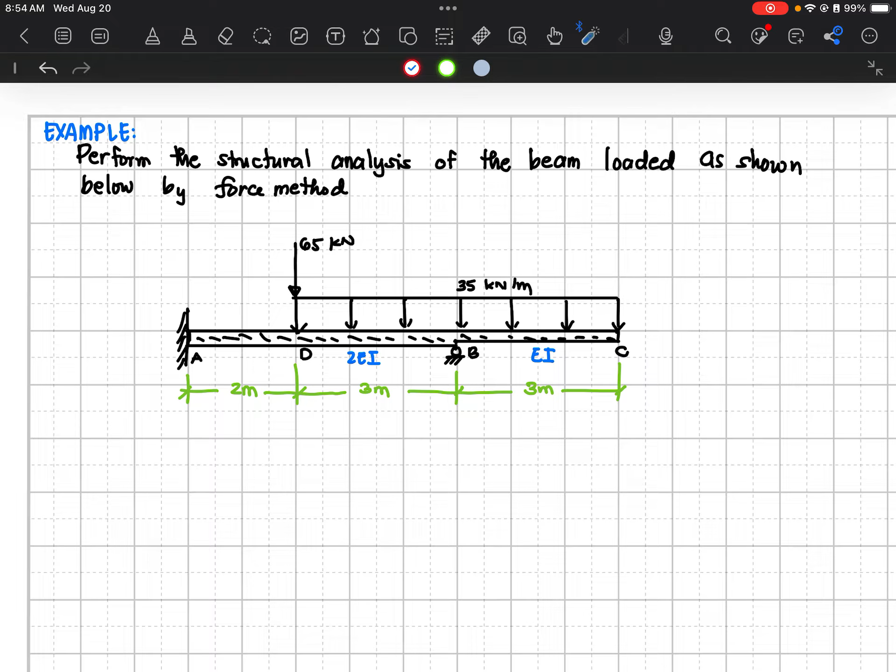So without further ado, let's now try to understand and solve this structure. The question is to perform the structural analysis of the beam loaded as shown below using the force method. So let's not delay further, let's solve this right away.

For the solution, let's try to copy this. Although obviously this is a prop beam class, and as you know, a prop beam is statically indeterminate to the first degree. But still, it's better if we check it.

At A, there will be two reactions, AY and the moment at A. At B, we have BY. So here, the number of reactions is 3 and the number of members is 1. Take note, our check formula for beams is R equals 2M. So this is 3 versus 2 times 1. Obviously, 3 is greater than 2, and therefore this is indeterminate to the first degree, since 3 minus 2 equals 1.

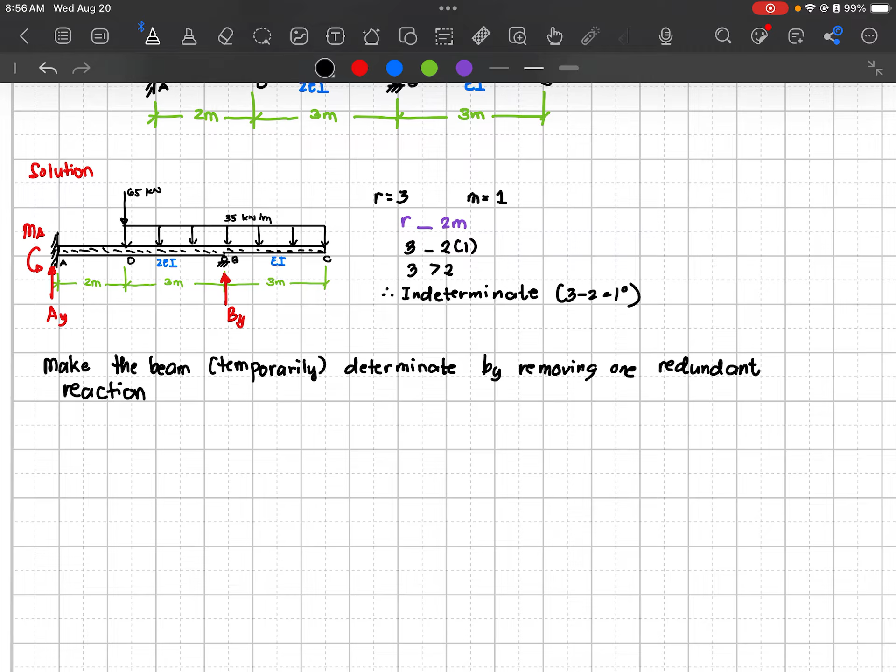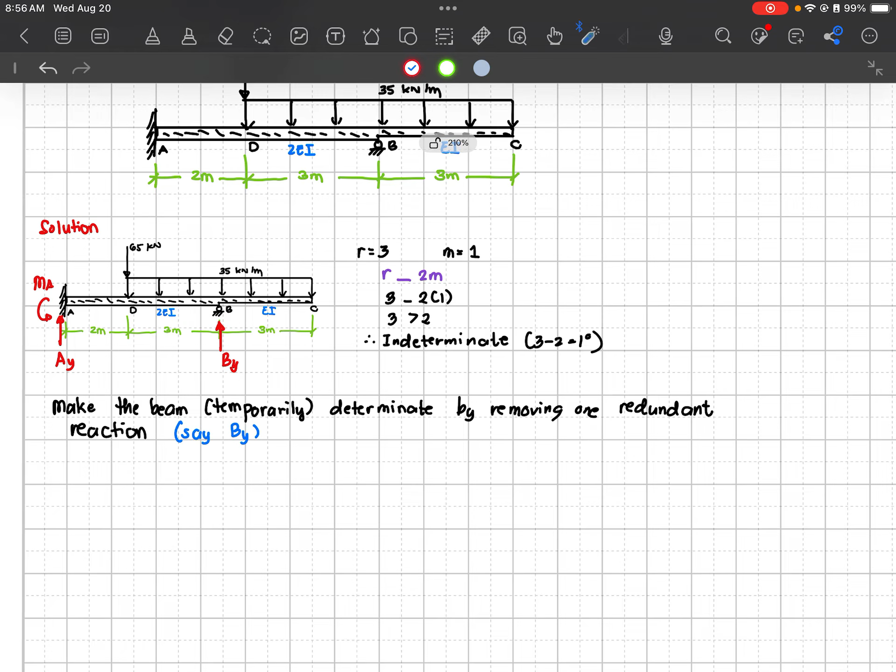We do this by removing one redundant reaction. So that's what we'll do - we'll try to make it determinate by removing a redundant reaction. Usually, it's the simple support that we remove, so it means this roller support at B is what we'll temporarily remove. But again, this is only temporary since we need to use the unit load method.

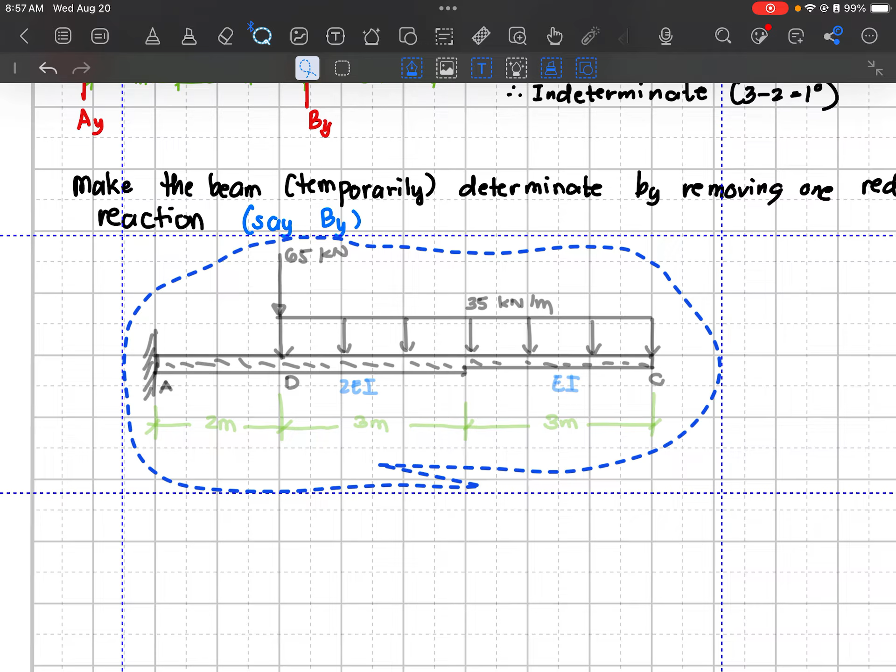So here it is. Let me remove that, and therefore, with the moment that I removed, it becomes a cantilever beam. Take note, a cantilever beam is a statically determinate beam, meaning we can solve the support reactions by statics alone. So that's what you'll do, class.

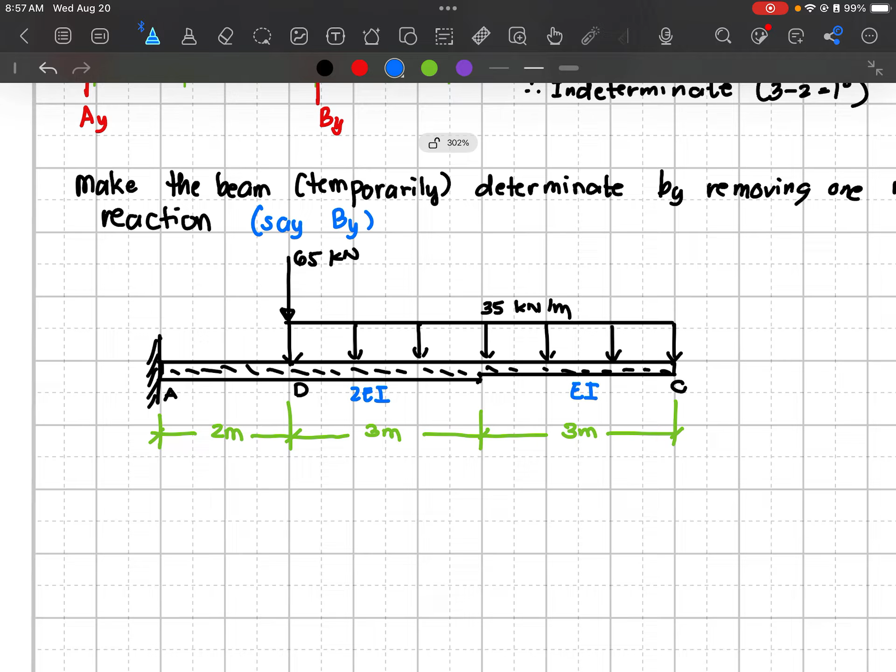Please compute for the AY and also the moment at A. If you want to solve it on your own, please pause this video for a while. So go ahead and pause it now.

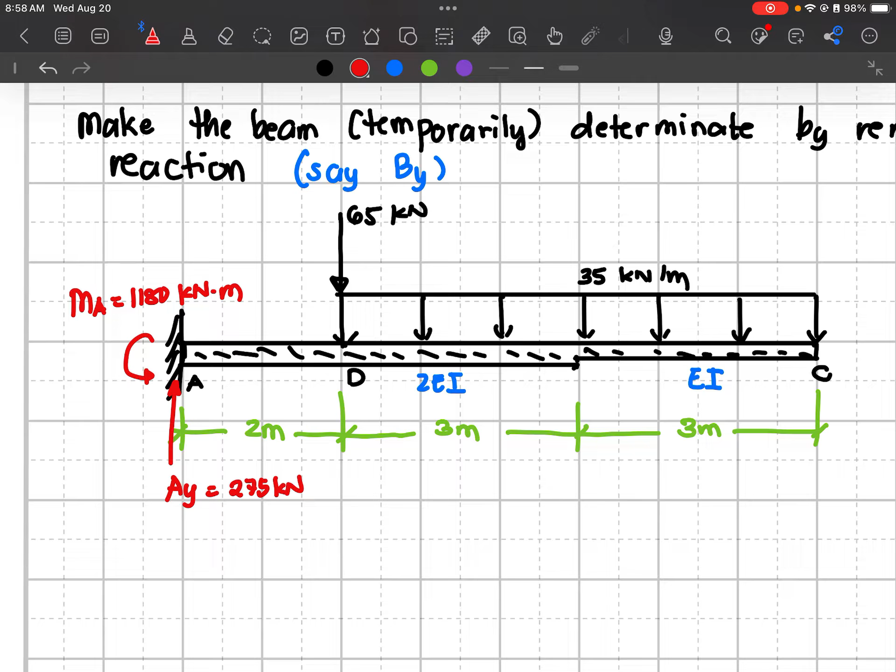Now I assume you've played it and solved the support reactions, and you want to check if your computed values are correct. Let's check. So actually, the AY here, class, is equal to 275 kilonewton, and the moment at A is 1180 kilonewton meter. So those are our temporary reactions, class.

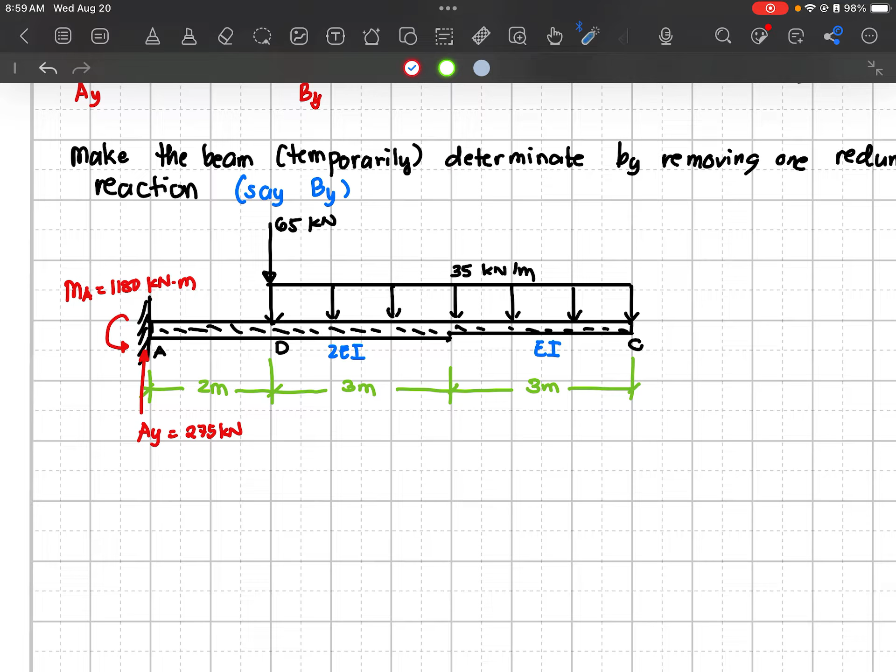The next thing we'll do is derive the moment functions of our beam. Here, it's divided into two spans, class - that's AD, then the next, DBC. As you can see, should we consider separating DB and then BC? You could, class, but that would just waste your time and another drawing, so you can treat DBC as one span.

Remember, the causes of discontinuity in the moment function are only if there is a change in behavior of the load, which from D to B to C, there isn't, or the existence of a concentrated load within that part. So there isn't.

Hindi po nakaka-affect yung pag-change ng flexural rigidity. Yun yung tandaan nyo, no? The change of flexural rigidity will not affect the derivation of the shear and moment function. So at this point, dalawa lang siya, yung AD, tapos yung DBC.

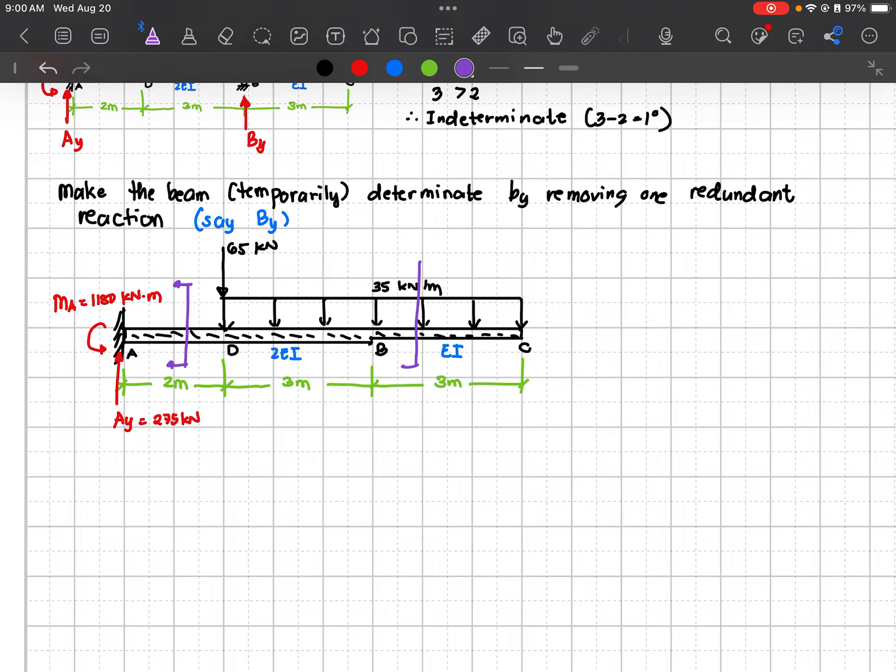So yun lang yung i-consider natin, no? Dalawang cut ang gagawin natin para ma-derive yung dalawang moment function, no? So first gawin natin. Pag kinonsider natin yung AD, obviously class, the limit of that is from 0 to 2.

So i-drawing mo lang siya. Tapos lagay lang natin yung AY as 275. Yung moment at A is 1180. So ito yung point A natin, class. Tawagin natin yung point of cut as point X, and the distance is of course X. Ang dinodrawing ko itong part na yan because as you can see, from A to that point, wala namang load na nag-a-act, no? And of course, do not forget yung mismong moment natin na naka-counterclockwise.

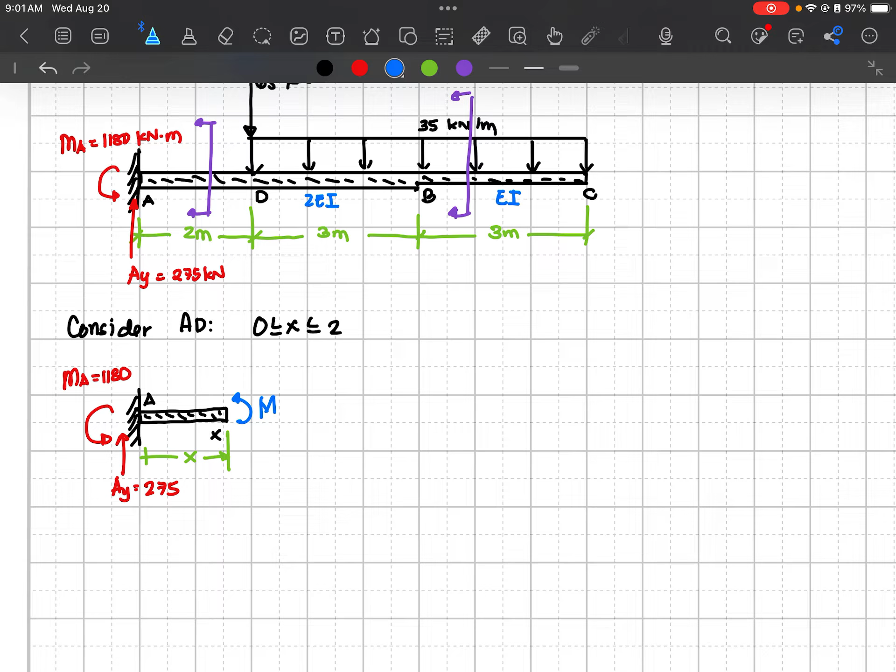So here, summation moment at X is equal to 0. So clockwise moment equals counterclockwise moment. Ang clockwise moment lang dyan is yung 275 times X, and yung counterclockwise is yung 1180. And of course the moment itself or the moment function, kaya obviously yung moment natin dito ay 275x minus 1180. So ayan, na-derive na natin.

So yung sunod na i-consider ko lang, class, para ma-derive yung M is itong DBC. Ayan siya, consider DBC, and that's from 2 to 8. 2 to 8 na yan, class. So pag drawing natin siya.

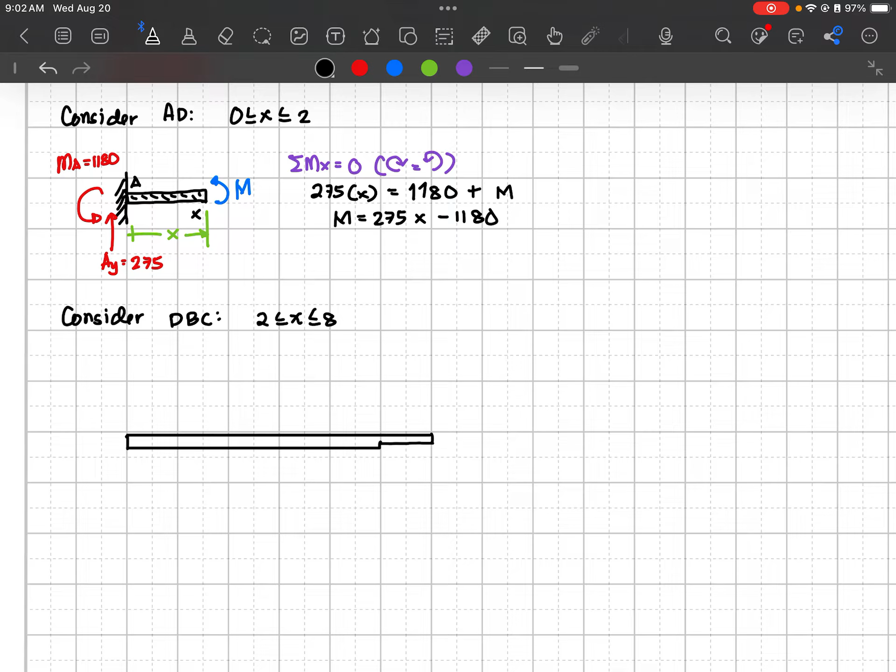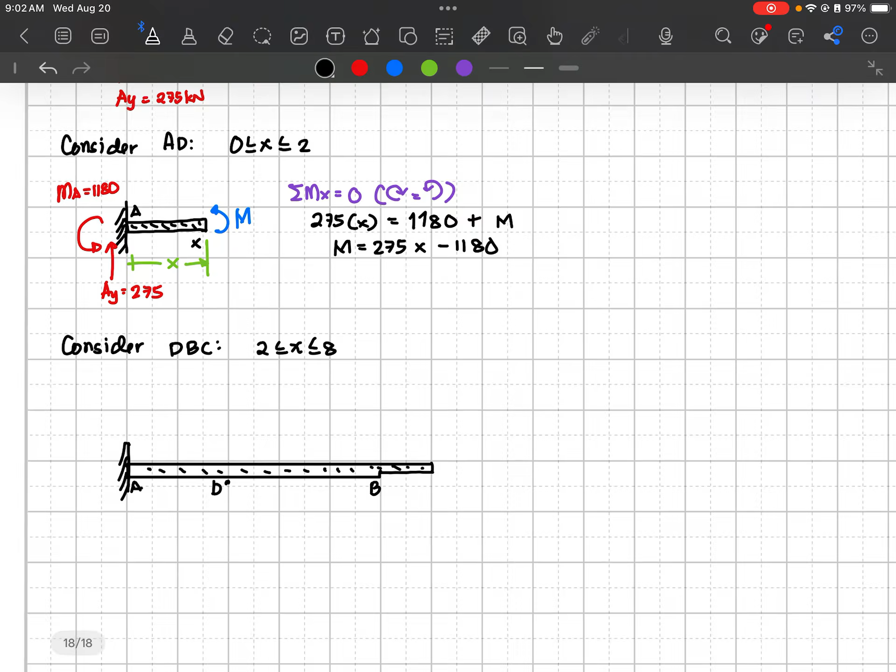Ayan, pasensya na. Ito yung A, nandito yung point D, ayan yung B. So lagay lang natin, class, yung lahat ng loads, might as well the reaction. Yung idodrawing ko itong part na to ng beam natin kasi nasa DBC na tayo, class. So here, the load, do not forget. Tapos yung concentrated dito, na 65 kilonewton, ito naman 35 kilonewton per meter.

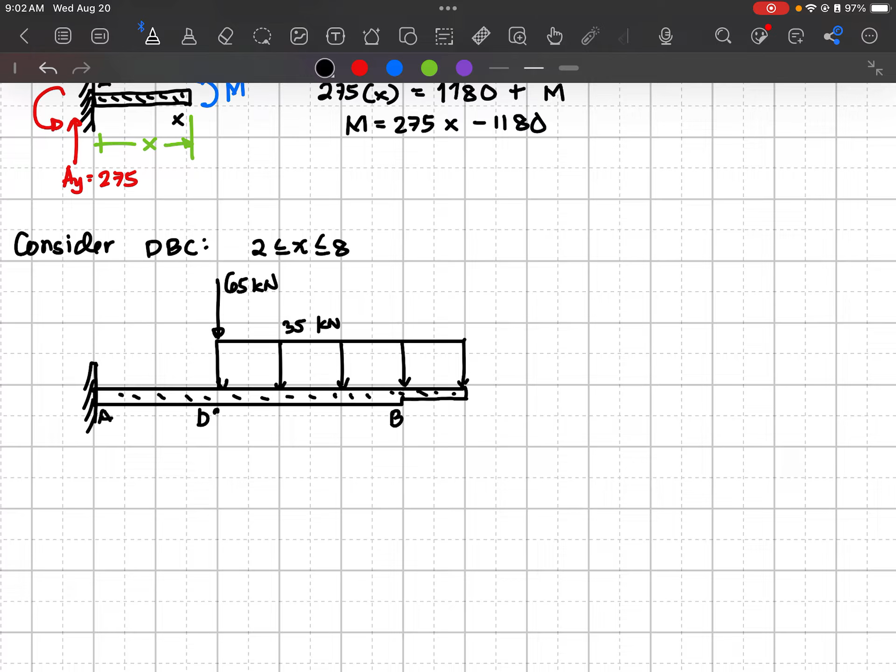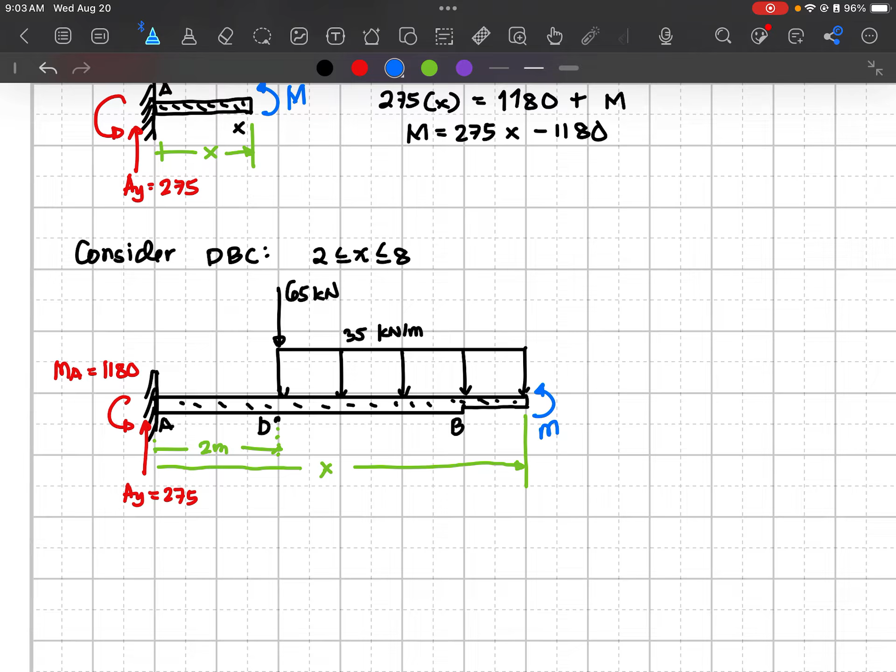Then yung sunod naman, yung AY na 275. Tapos yung moment at A na 1180. Then ito, distance X, ayan siya. I-set natin to as distance X. And alam naman natin from A to D, that is 2 meters. So here, ang ilalagay na lang natin is the moment, capital M pala to, because it's referring to the real loads.

So sige po, summation moment at x equals 0. So clockwise moment equals counterclockwise. Nakalimutan kong iset ito as point x. So here, for the summation moment, yung clockwise moment is only the 275 multiplied by x, as you can see, clockwise siya. And the counterclockwise magsisimula sa 1180, and yung mismong 65 kilonewton, counterclockwise yan, and that is, ang moment arm niya ay x minus 2, diba?

So 65 times x minus 2. And do not forget the rectangular load, 35. Yung haba niya ay x minus 2. So x minus 2 siya. And do not forget that the center of gravity is here, which is obviously kalahati yan ng x minus 2. So here, lagay ko siya 1/2 ng x minus 2. Then plus the moment itself. So ayan na po, yung ating equation.

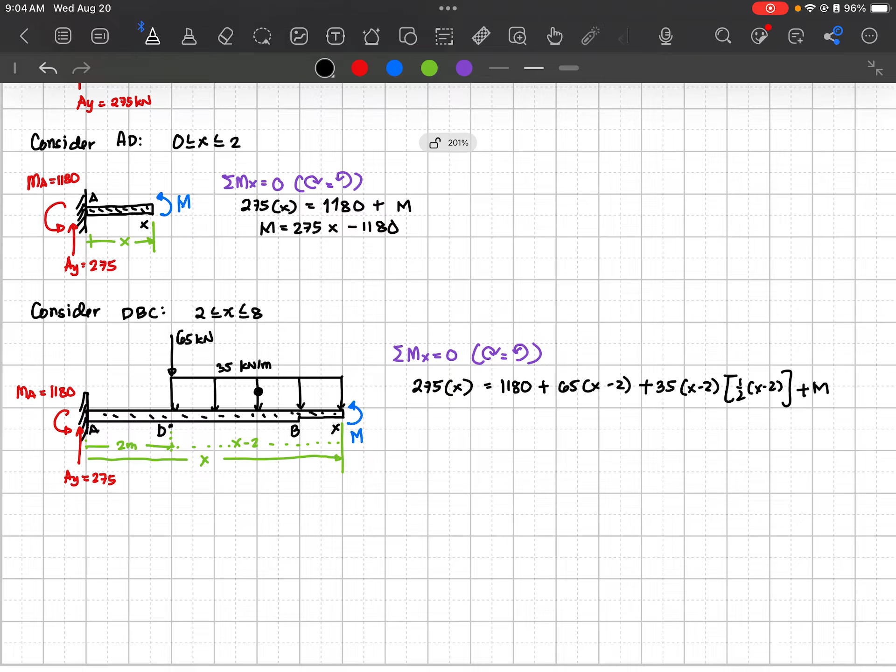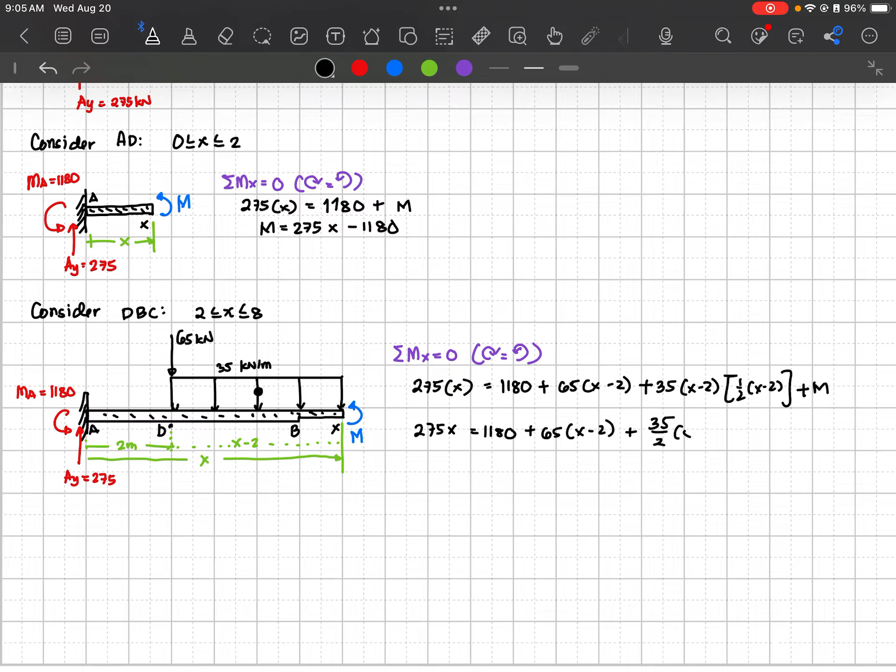So simplify further, so this is halimbawa: 275x is equal to 1180 plus 65(x minus 2) plus, pag sinimplify mo yan, 35 over 2 times (x minus 2) squared plus moment. And therefore, yun na nga, the moment function is 275x minus 1180 minus 65(x minus 2) minus 35 over 2 (x minus 2) squared. So na-derive na natin, class, yung moment function natin for DBC.

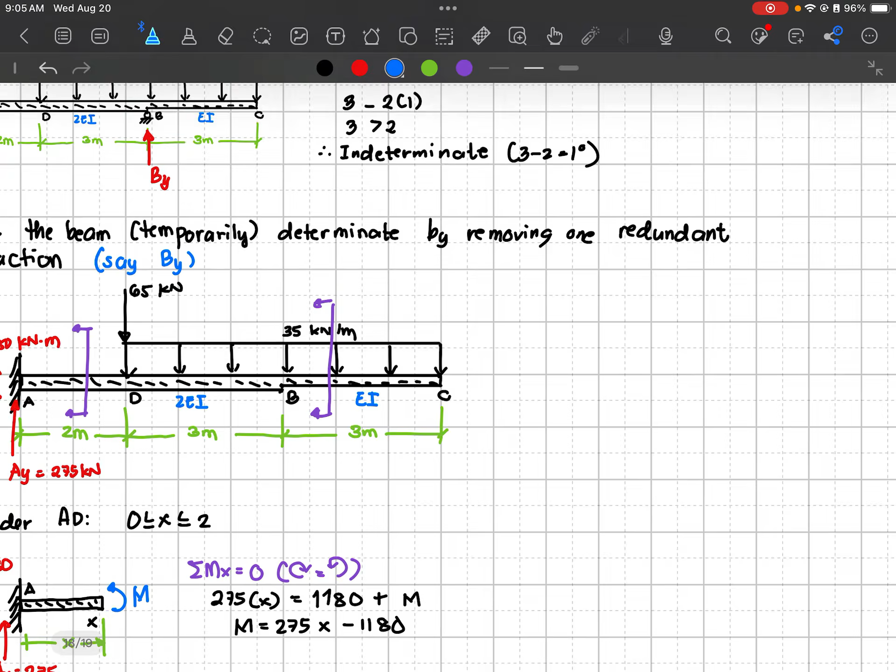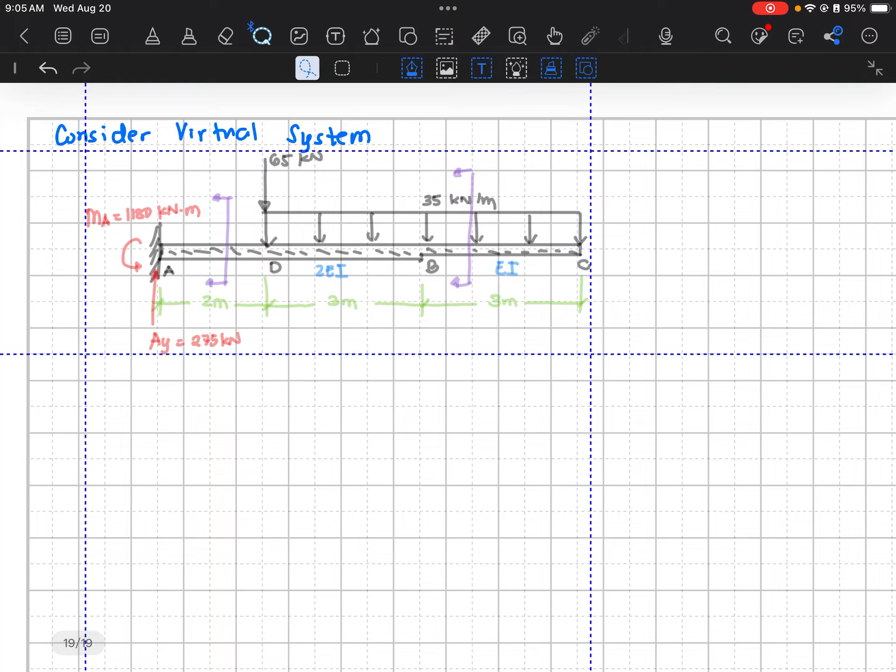So ngayon, tapos na tayo dyan. We will now consider the virtual system. Consider virtual system, class. And in this case, syempre, i-consider ulit natin itong temporary beam natin. Again, yung temporary, yung tinanggal mo yung support at B, kasi nga yun ay sa ngayon determinate pa.

Ayan, pero ngayon, ang magiging kaibahan, class, is dahil nasa virtual system na tayo, tatanggalin natin yung lahat ng load. So even this one, ayusin na lang natin. Dapat pala, yung kinopy-paste ko na lang yung original beam. So erase ko lang po ito. Ayan, so yun, dito na lang.

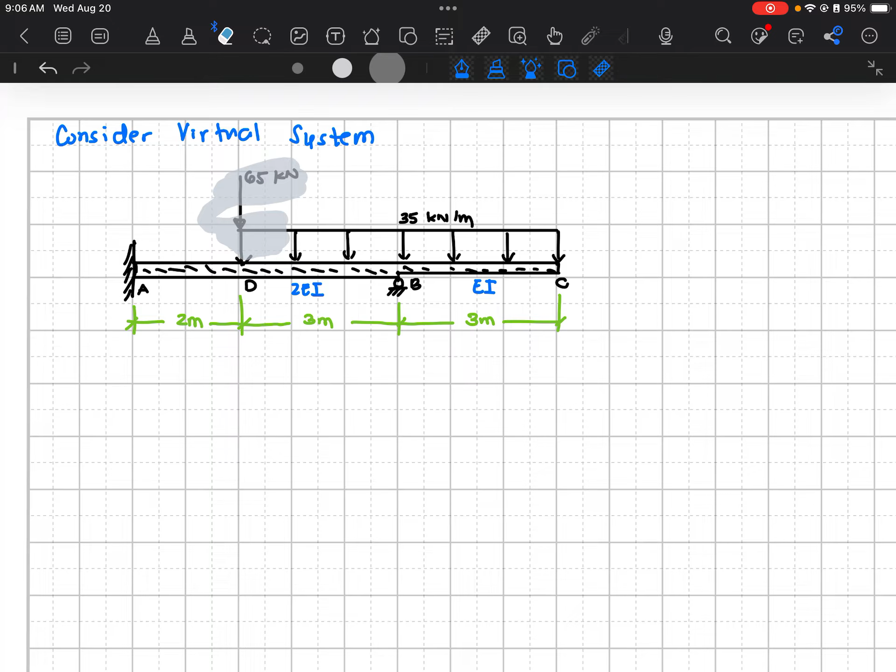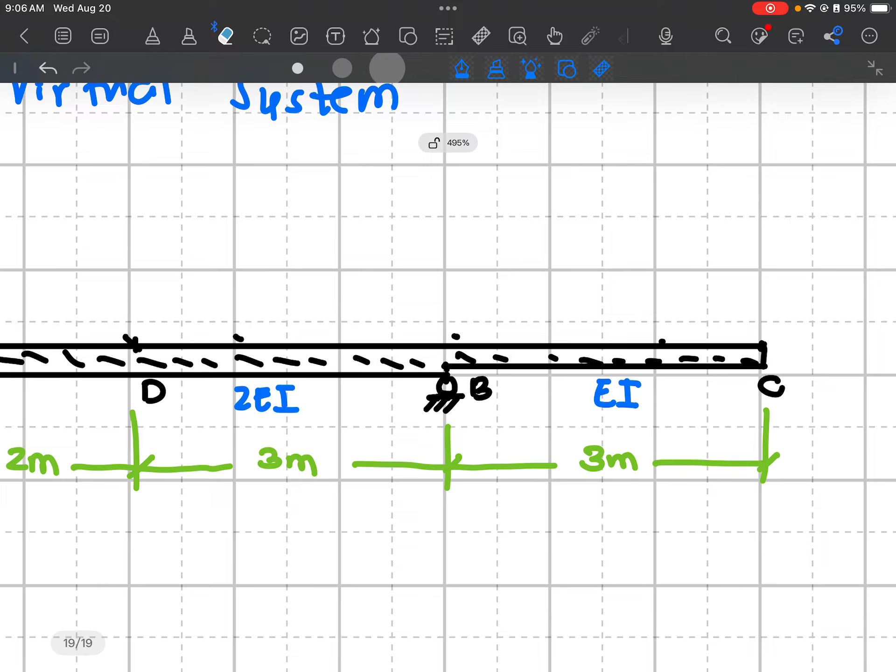So kung i-consider natin itong virtual system natin, tatanggalin natin this time yung lahat ng loads. Remove. Konting polish. Tapos yung support at B ay still remove at this time.

Ngayon class, ang mangyayari dito, kapag virtual system and using force method, maglalagay tayo ng force sa B. Bahala ka na kung yung gusto mong ilagay na force ay pataas or pababa. Usually naman, ang nilalagay natin ay pababa, depende na lang sa inyo kung ano yung direction ng ilalagay mong force at B. Bakit sa B? Kasi yun yung original na location nung tinanggal natin na hinge support, o roller support, kaya dapat dyan ka maglagay ng unit load.

So ngayon, dahil dyan, yung next lang naman na gagawin natin dito, class, is to determine the reactions at A, which is very obvious naman na yung AY is equal to 1 and yung moment at A this time is equal to 5. Simple equilibrium lang yan.

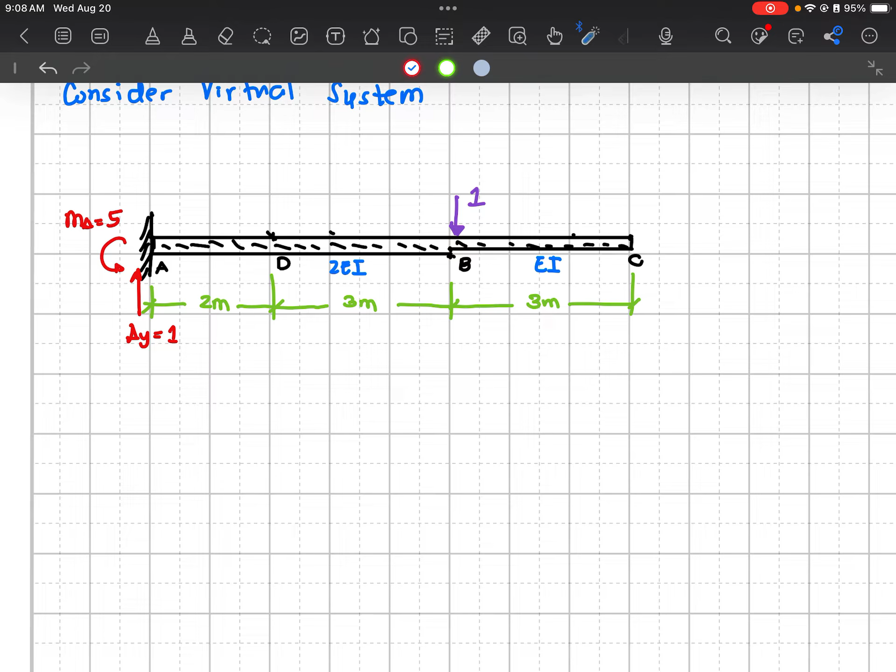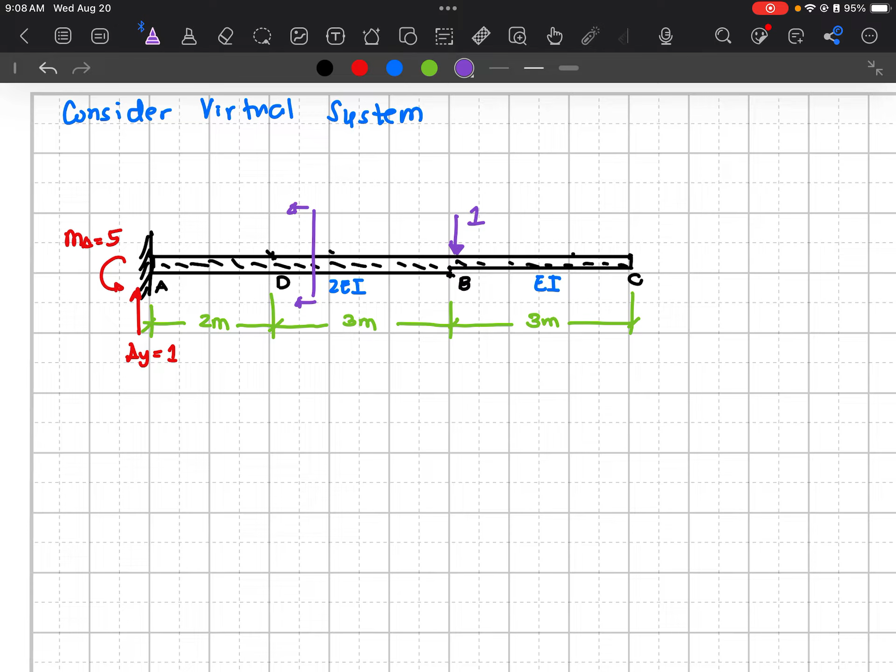Then yung next, magdi-derive tayo ng dalawang moment function sa virtual system. Yung una, para sa ADB, dire-diretso lang siya hanggang sa B. Tapos yung pangalawa naman is para sa BC. So dalawang cut ang gagawin natin dito - para sa ADB, which is from 0 to 5, at para naman sa BC, which is from 5 to 8. Sige, gawin ko na siya para hindi sayang yung oras.

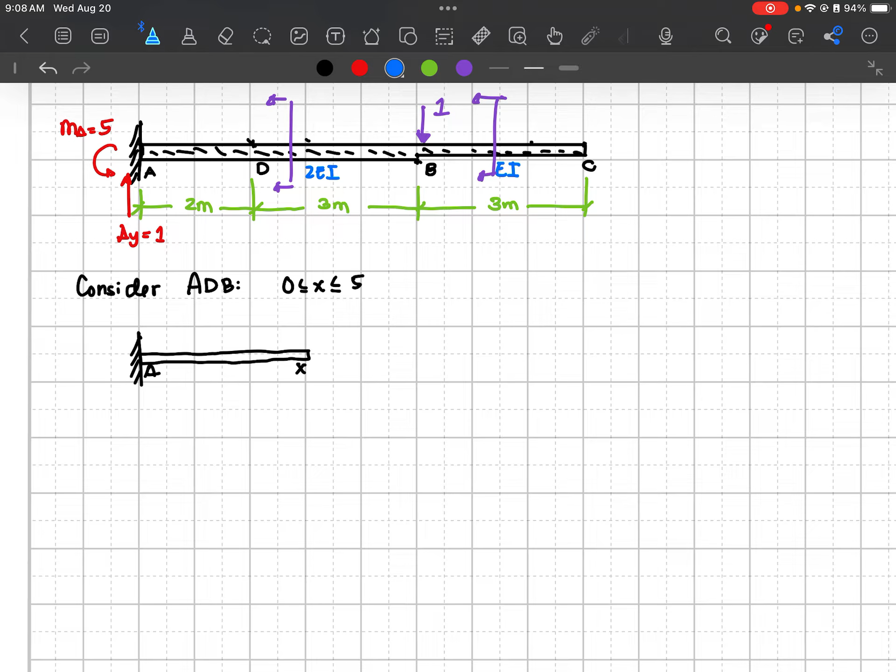So pag kinonsider natin yung ADB, which is from 0 to 5, i-drawing mo lang class itong part na to. Dito nga, tiyagaan talaga sa pag-drawing. Ito yung A, tawagin ko yung point X as the point. Tapos lagay ko lang yung M - kasi pag due to the virtual load, small letter M - so distance X, do not forget.

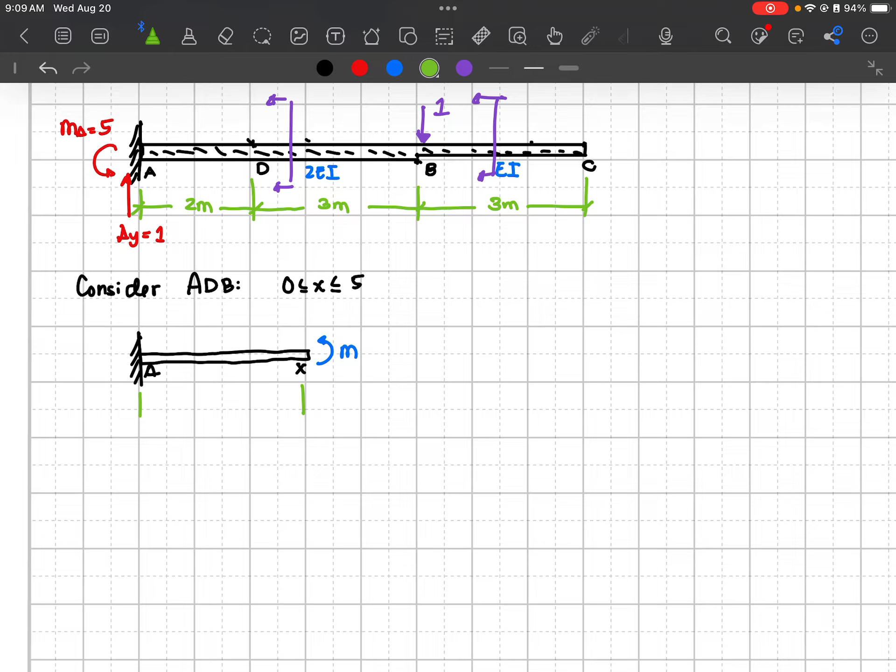Ayan siya. Then yung support reactions natin, AY is 1, moment at A is 5. Here, it's very simple: summation moment at X equals 0, so clockwise moment equals counterclockwise. Yung clockwise, 1 times X, at yung counter, 5 plus M - kasi ito counter, ito din counter. Pag sinimplify mo to, X equals 5 plus M, or yung M natin ay X minus 5. So that is now the moment function from 0 to 5.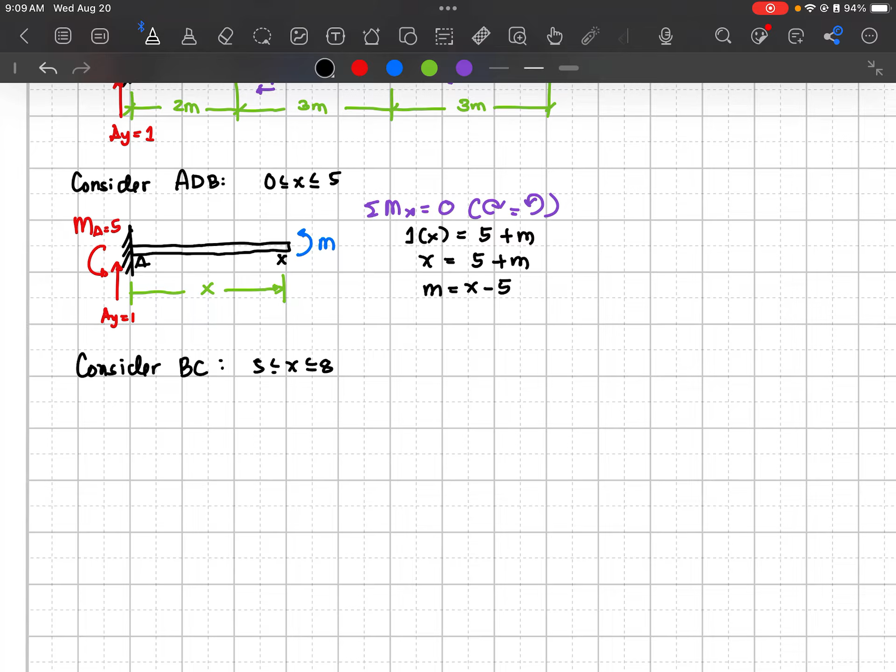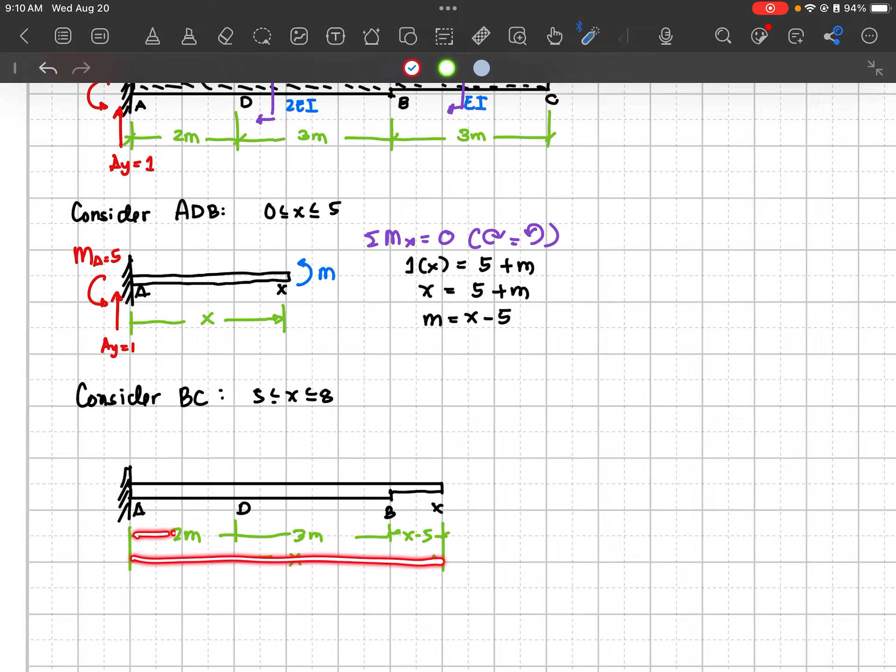Then finally, consider din natin dito yung BC, which is from 5 to 8 - yun naman yung magiging limit niya dito. Drawing ulit natin yung beam na mas mahaba. Ito yung A, ito yung D, ito yung B. Tawagin ko lang yung point of cut as X. Alam naman natin na ito 2 meters, ito 3 meters, at finally itong part na to is X minus 5. Very obvious, kasi syempre ito naman 5 meters, so dapat yun ay X minus 5.

So of course, huwag kalimutan, may nilagay tayo ditong reaction na 1, tapos o yung unit load na 1. Then ito naman, AY is 1, moment ng A is 5. Here, ang kalalabasan ulit, summation moment at X equals 0, so clockwise moment equals counter. Nakalimutan kong maglagay ng small letter M dito.

So yun, ang clockwise is simply 1 times X, and for the counter, obviously that's 5, tapos yung unit load natin na 1 na X minus 5 plus the small m natin. Pag sinimplify ko to, X is equal to 5 plus, pag dinistribute ko yan, X minus 5 plus M. Obviously, as you can see, cancel out yung 5 kasi 5 minus 5 is 0. So X is equal to X plus M. Pag nilipat mo yan, M is equal to X minus X, or pwede mong sabihin ang moment natin ay 0, which is okay lang naman. Normal din lang naman din na may ganyang instance.

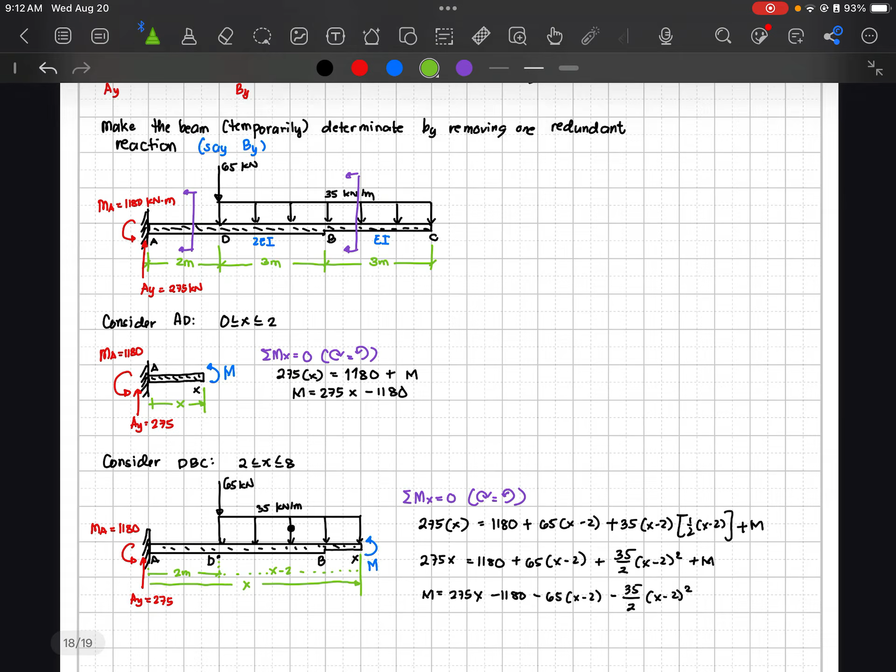So ito na yung ating moment function from 0 to 5, at ito naman yung moment function from 5 to 8. So this is the way - ito yung real system ng temporary determinate beam natin, at ito naman yung virtual system. Itaas ko lang.

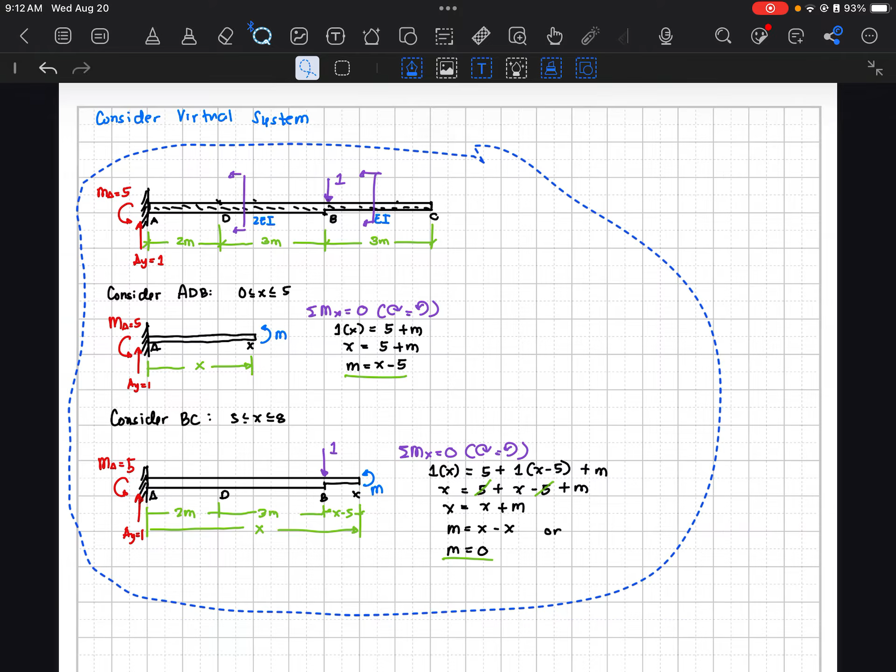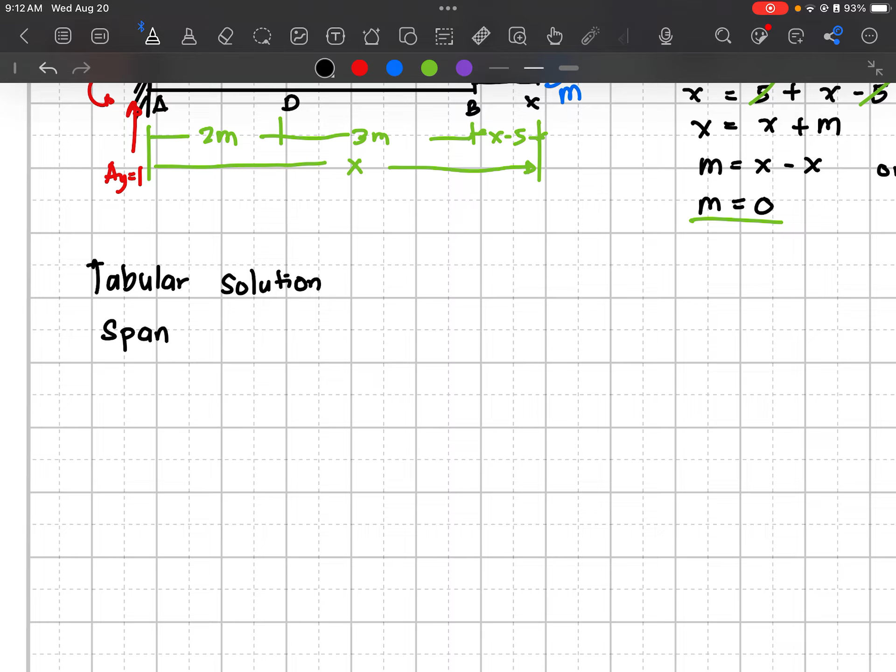Ayan, no? So now, para mas malinis yung magiging solution natin, gawan natin to class ng tabular solution. So here, meron tayong mga span. Tapos, yung span natin ay 3 at this point, no? Pero sige, later on na lang.

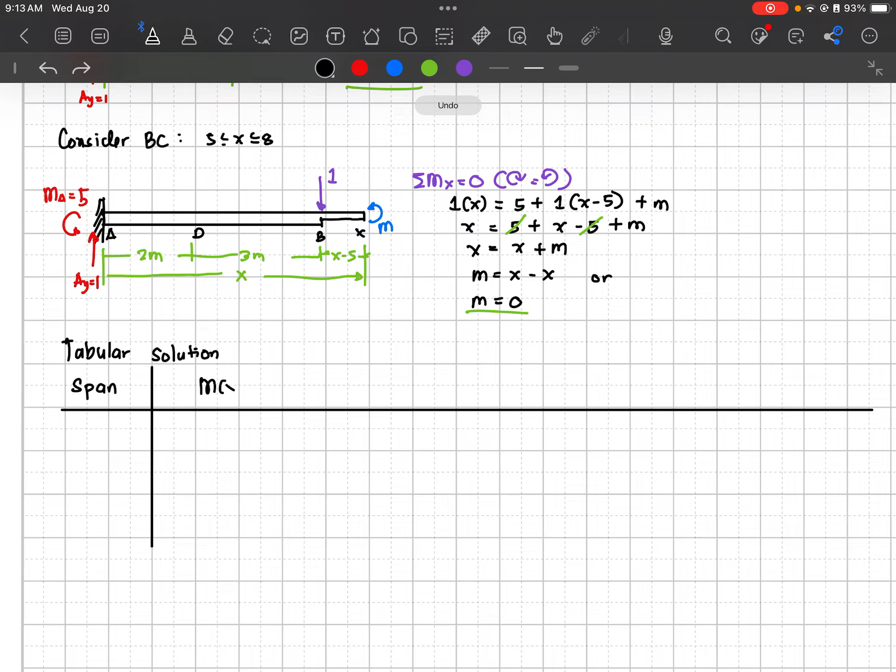Ayan, no? So meron tayong span. Tapos yung next na isusulat natin, yung big M, no? Pero dito class, para tuloy clear, hahatiin natin to sa 3 span as the original, yung AD, yung BD, and yung BC, no? Yung AD, that's from 0 to 2. Yung DB that's from 2 to 5, and yung BC that's from 5 to 8, no?

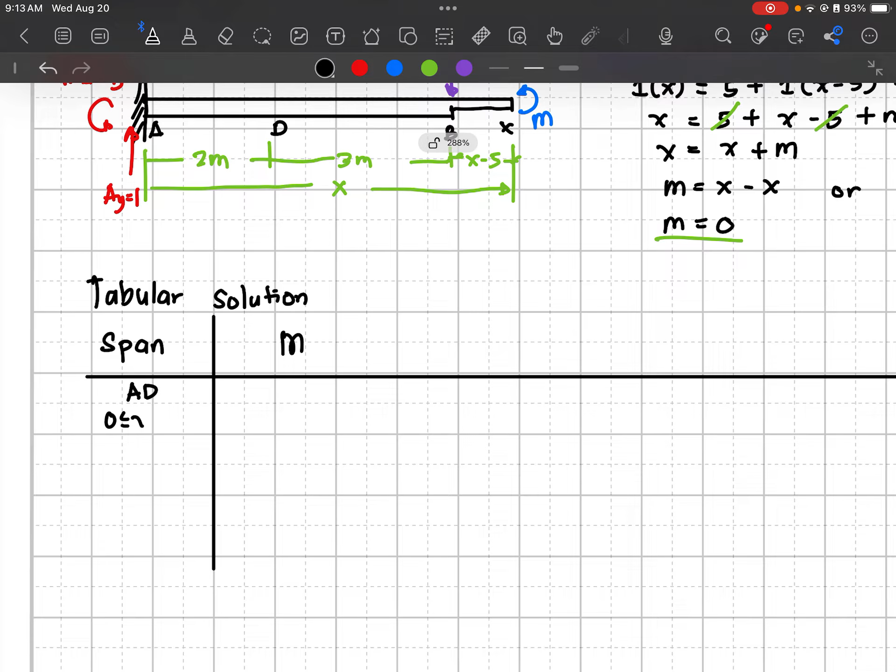So para maging ano tayo, no? Maging mas maayos yung solution natin. So again, yung AD from 0 to 2, adjust natin yung magiging borderline. So ayan siya.

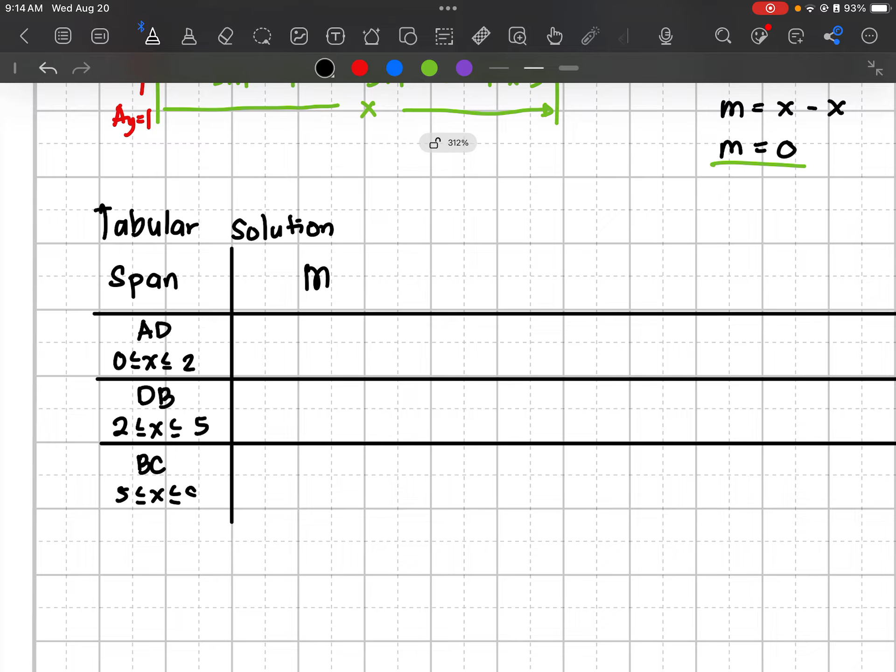Tapos yung sunod naman, yung DB that is from 2 to 5. Ayan, no? And finally, yung BC, that is 5 to 8. So ayan yung ating mga span.

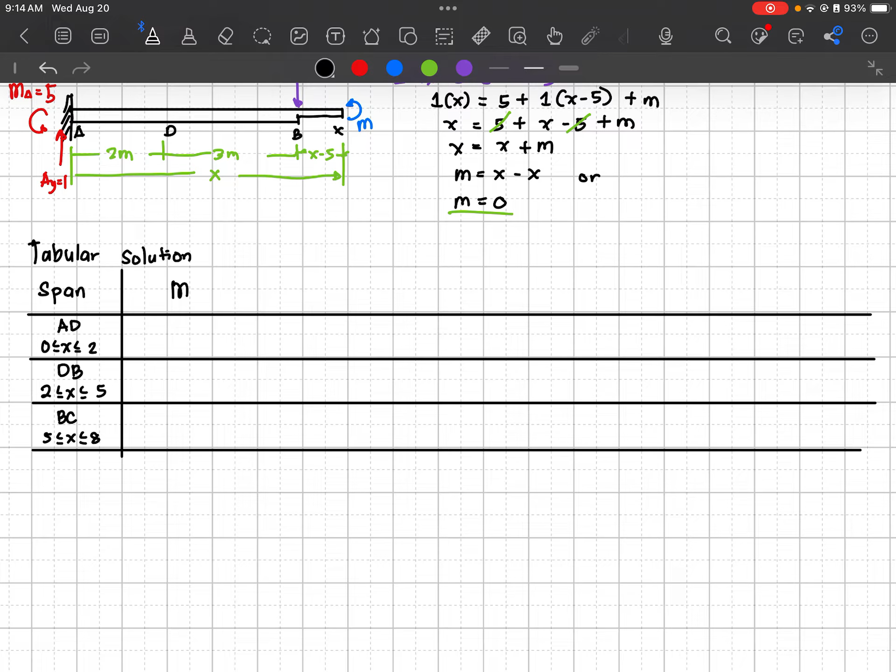So yung next na i-consider natin, class, is yung big M. So as you can see, dito sa real function, itong unang na-derive natin is from A to D. So ibig sabihin, from 0 to 2 lang siya. Kaya itong 275x minus 1180 ay para lang yan sa A to D.

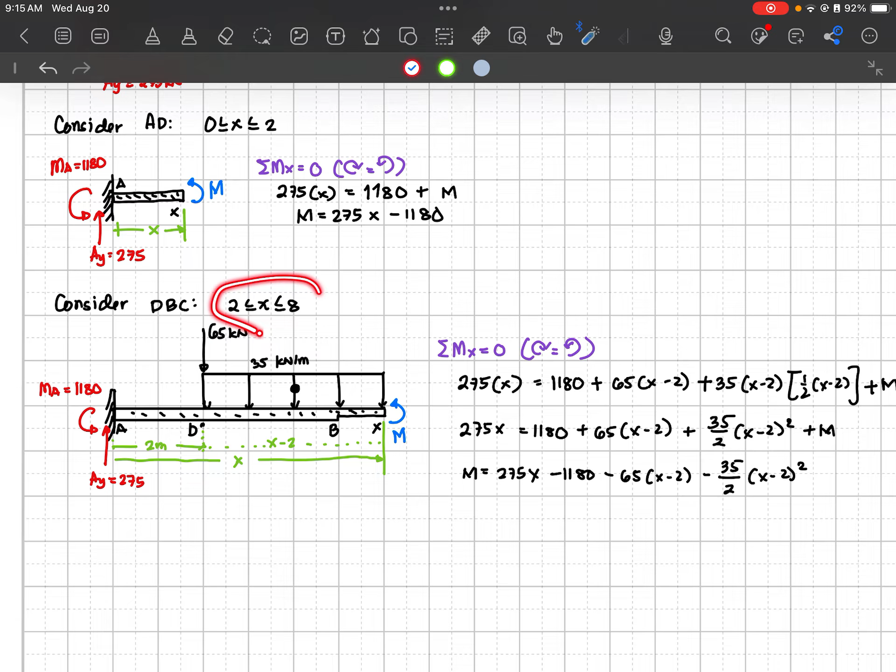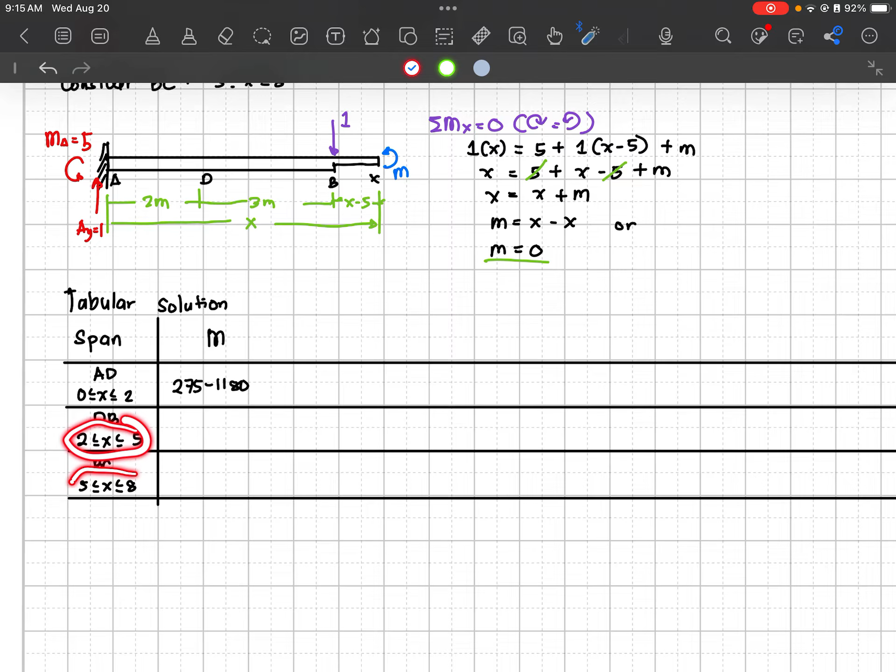Pero tandaan nyo na yung sumunod na span na na-derive natin from DBC, ibig sabihin from DB and at the same time from BC. So yung dalawang yon isang function lang siya, which is itong 275x minus 1180 minus 65 times x minus 2 minus 35 over 2 ng x minus 2 squared. Kasi nga, di ba, yung limit natin is from 2 to 8. Ayan, no, 2 to 8 na siya. So ibig sabihin, pag sinulat ko siya, itong DB sa BC, isa lang itong moment function niyang M, kasi nga itong DB 2 to 5, yun naman 5 to 8. So parang pinagdugtong mo lang siya para maging 2 to 8, no?

So ayan. So ito pala mali yung nasulat ko. 275x yun, minus 1180. Ito naman, 275x minus 1180 minus 65x minus 2 minus 35 over 2 x minus 2 squared. Tandaan nyo, no? Same din lang naman yan sa BC. 275x minus 1180 minus 65x minus 2 minus 35 over 2 ng x minus 2 squared, no? So ayan, nasulat na natin yung big M.

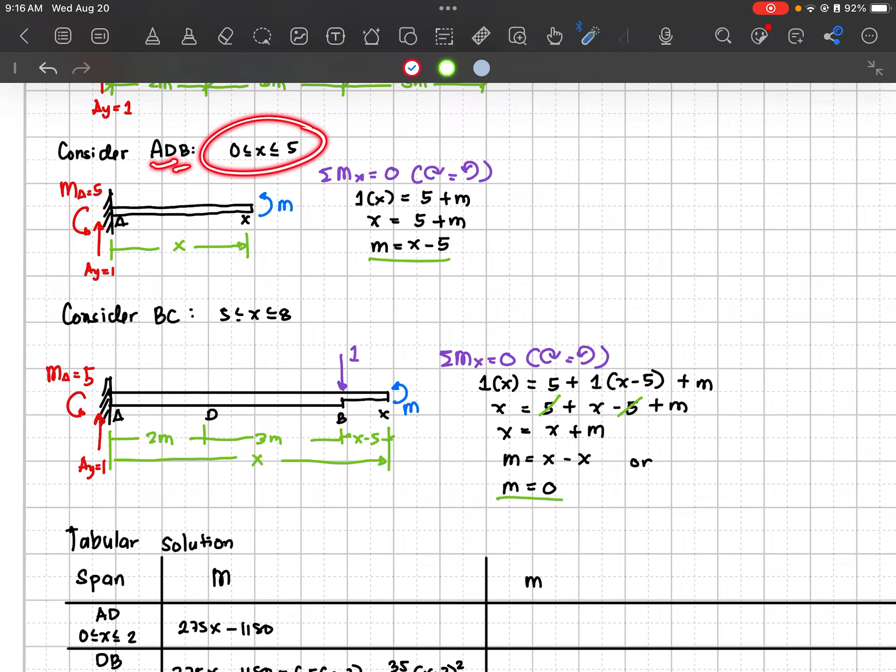So let's proceed to the small m. So sa small m naman, dalawa yung na-derive natin. And tandaan nyo, yung unang na-derive natin is from AD and DB. So ibig sabihin, from 0 to 5 siya. So sa table, ito yung isusulatan mo. Yung AD at the same time yung DB. Kasi from 0 to 2, then 2 to 5, no? So ganun yung system dyan, no?

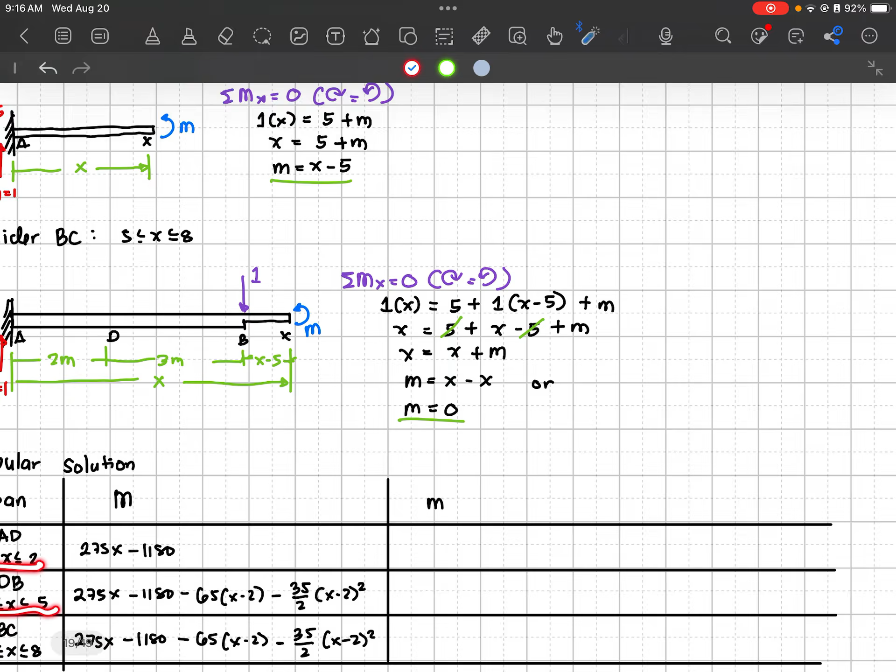So ito, isulat mo, x minus 5 and x minus 5. Then syempre, yung last naman class, yung BC, that is from 5 to 8. So yun yung may moment na 0, no? So ilagay mo lang siya as 0.

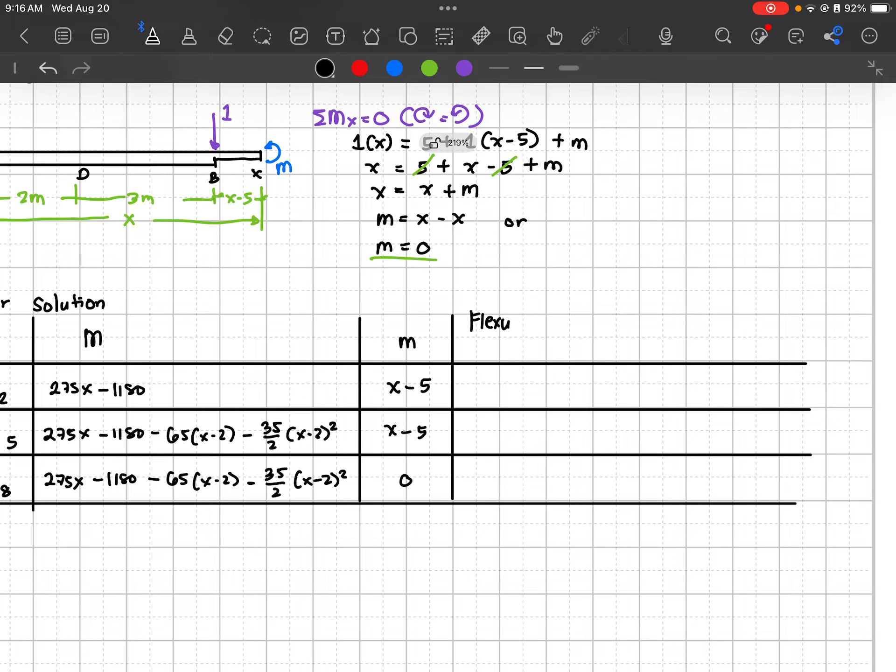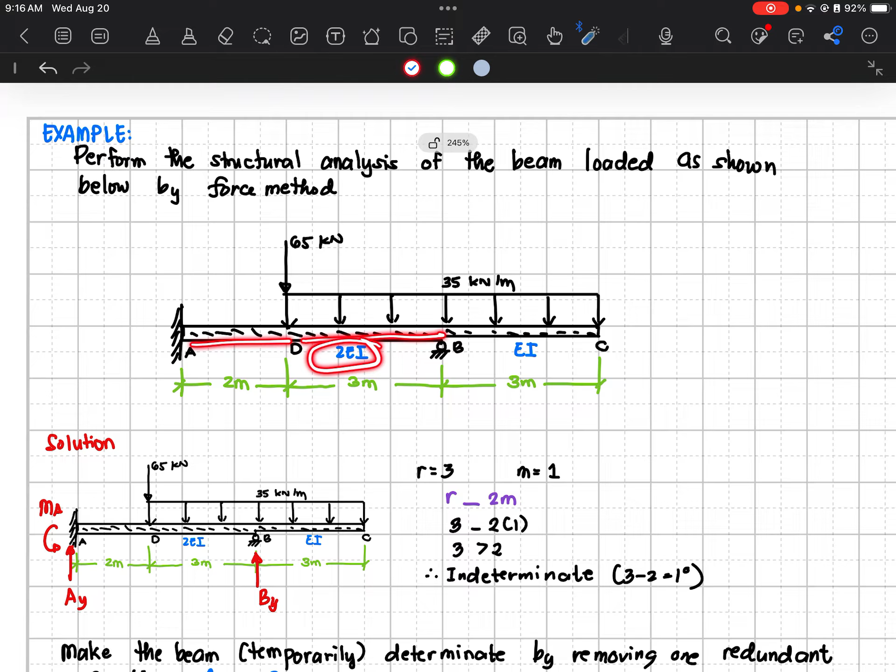So ayan. So yung next na gagawin natin, isulat mo lang dito yung flexural rigidity. So halata naman siya from the original na yung AD saka yung DB, ang kanilang flexural rigidity ay 2EI. Pero yung BC, ang flexural rigidity ay EI. So isulat natin siya dito na 2EI, kasi nga di ba? Yan yung AD and DB. Pero dito sa last, EI lang, no? So ayan, almost complete na tayo dito sa table natin.

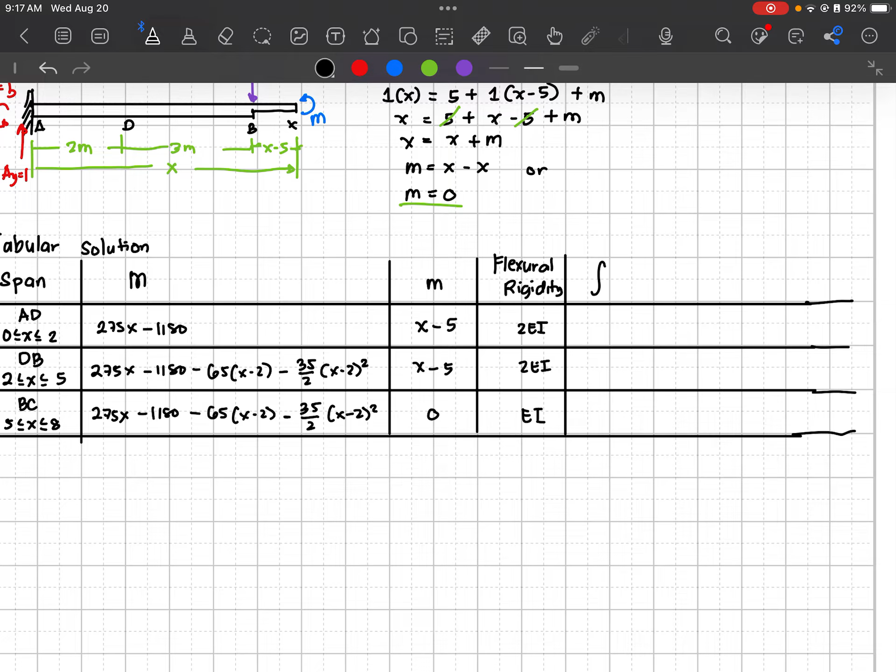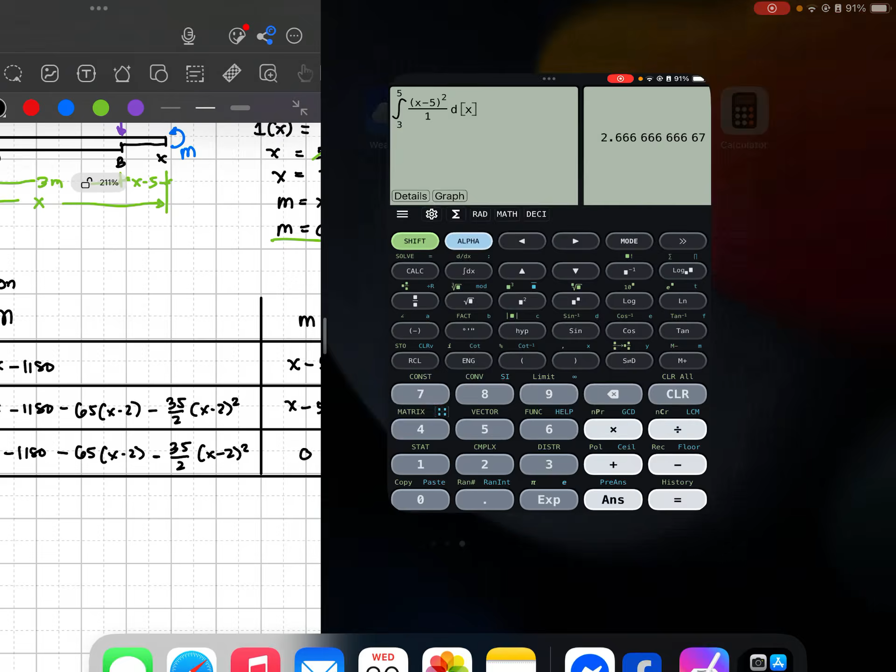So yung next na kukumputin natin dito is the integral of big M, small m over EI dx. And in this case, we will seek na lang the help of our calculator, no? So I know naman that most of you have a calculator that is capable of integrating. So just do that, no? So for example, dito sa una, yung function niya ay, so yung big M is 275x minus 1180.

Tapos, yung small m ay x minus 5. For the purpose of discussion, yung over EI, since over 2EI, kaya divide ko lang siya ng 2. So here, ang sagot from 0 to 2, kasi di ba, no, originally, yan yung limit niya. Then just let your calculator do its job, no. So yan ang lalabas, 3,711.

3711.667 over EI. Ayan, no? So dito naman tayo sa sumunod, i-ano ko siya, integrate.

Ayan, no? So mahaba-haba yung function. So that is 275x minus 1180 minus 65 ng x minus 2 minus 35 over ba't naka-plus? Dapat minus 35 over 2 ng x minus, oops, sorry.

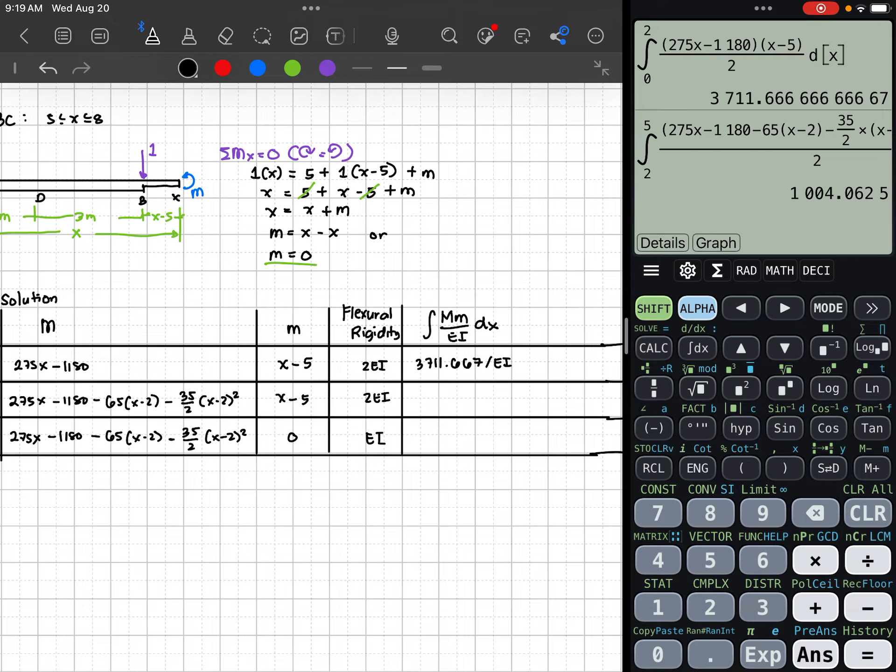Just let your calculator do its job. So the answer there is 1,004. Tama, 1,004 over EI. So 1,004.0625 over EI. Finally, let's go to the last part.

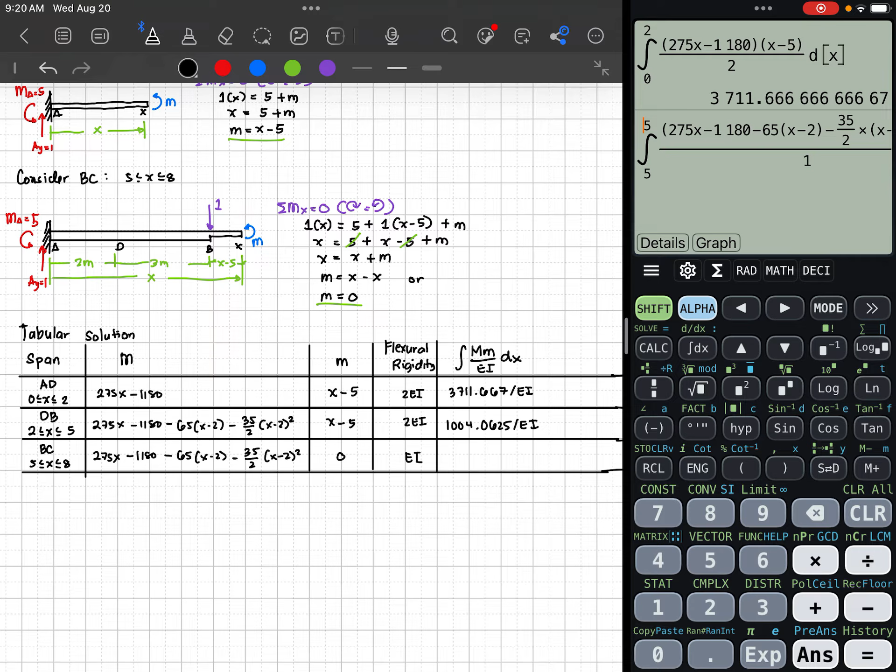It's quite long, let me just edit this. So it's over 1 this time, then raise it, because this becomes 0, since that's the small m. And here, from 5 to 8. Let equal sign show, so here it becomes 0. So we're done with that part.

Now for the last part, that's the integral of small m squared over EI dx. So small m is our only concern. When we integrate, for example here on AD, it's just x minus 5 squared, divided by 2, from 0 to 2. That's AD, from 0 to 2.

From 0 to 2, press equal sign, the answer is 16.3333 over EI. For the second one, x minus 5 squared again, so x minus 5 is the m, but the limit is 2 to 5. We'll simply change the limit to 2 to 5, press equal sign, the answer is 4.5 over EI.

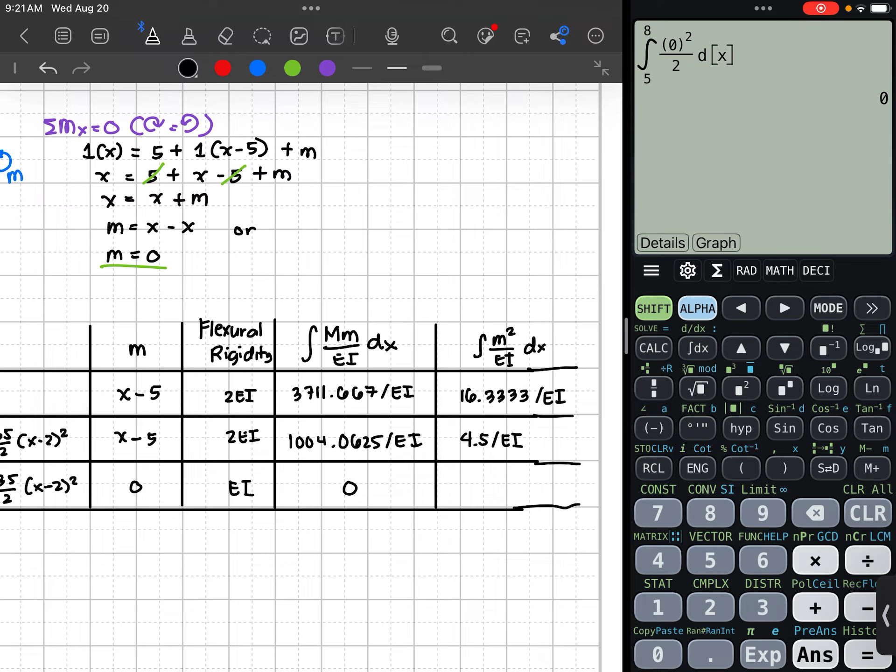4.5 over EI. Finally, for the last one, it's obvious already, but for formality, I'll write 0 squared over 2 dx from 5 to 8. Press equal sign, obviously that's 0. So we're done with that.

For manual integration, what you'll do is add them, because remember, delta 1 is simply the sum of these. When you add them: 3711.667 plus 1,004.0625, the answer is 4,715.7295 over EI.

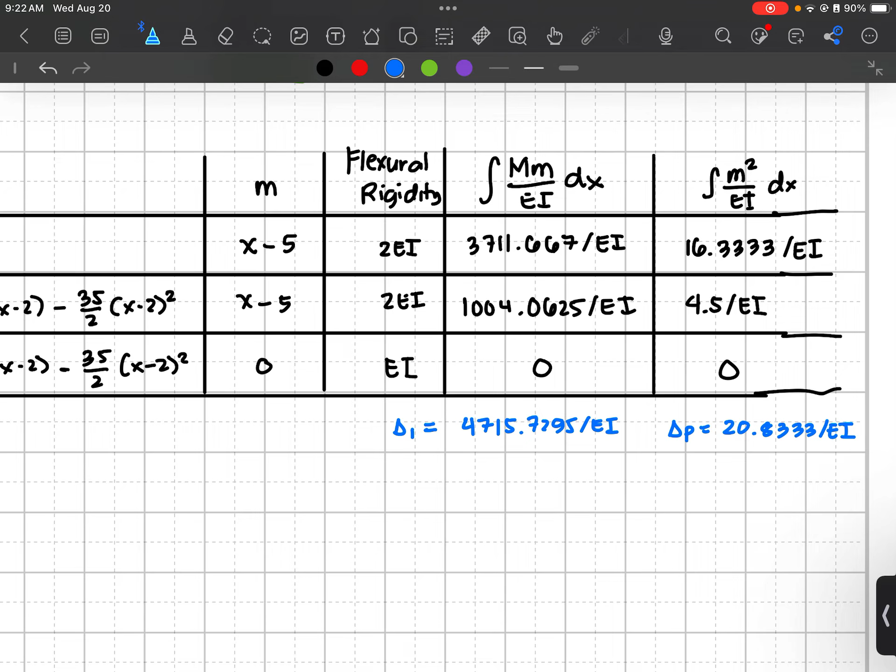Next we'll do the compatibility equation. Remember, delta 1 plus P times delta P equals 0. So: 4,715.7295 over EI plus P times 20.8333 over EI equals 0. Of course, EI cancels there.

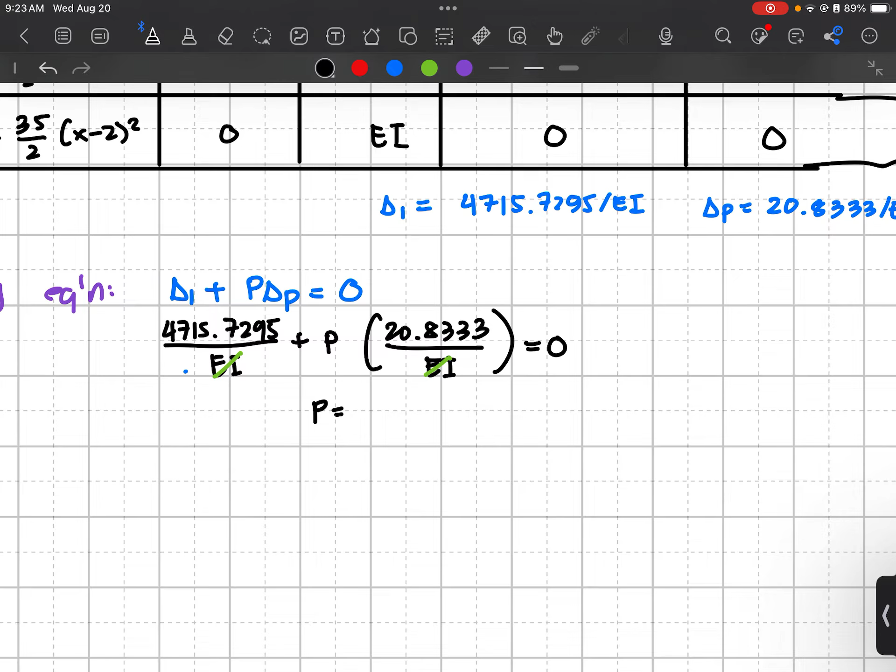Then you'll find the value of P. So the answer is negative 226.3554 kilonewton. That's the value of P that we found.

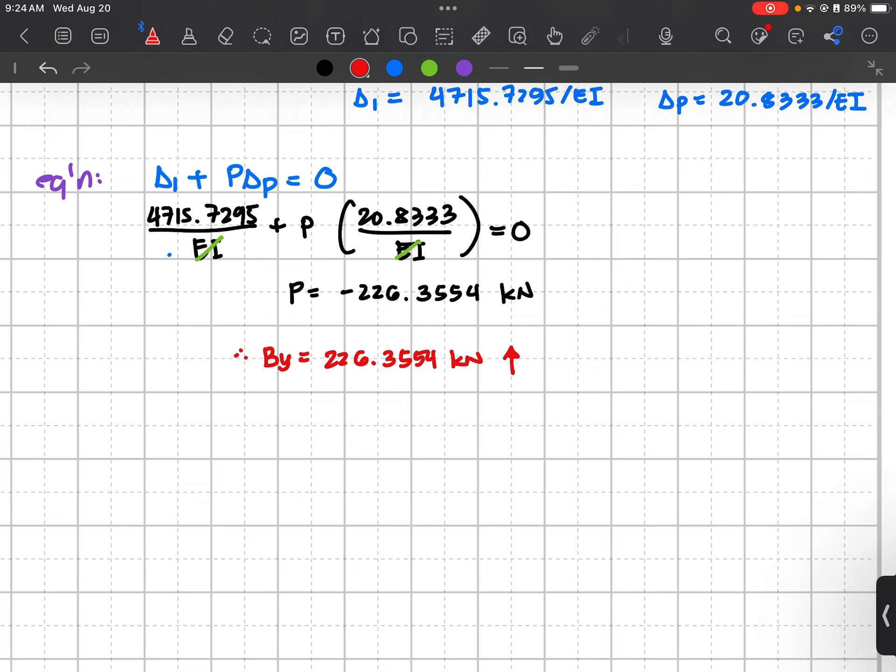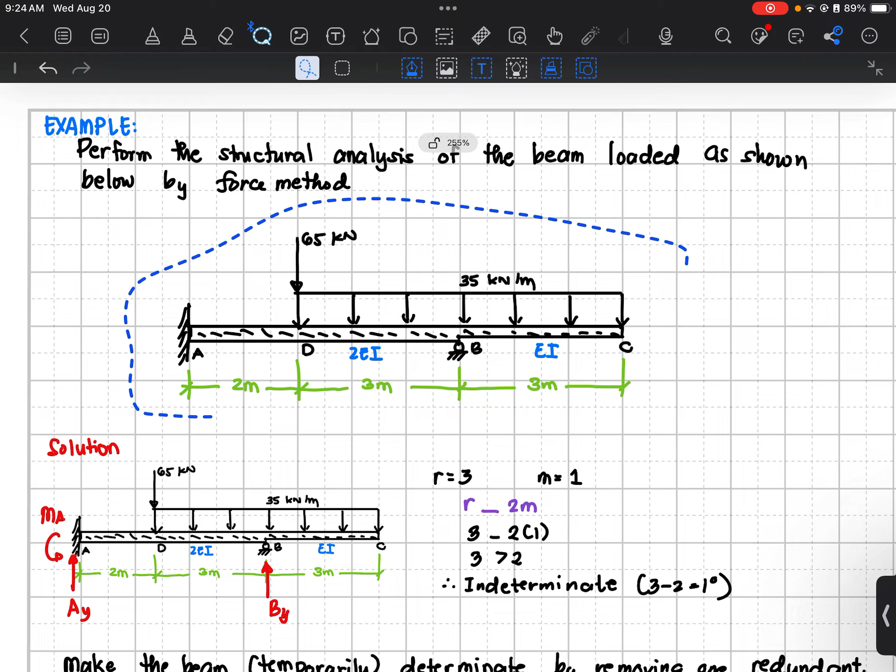That is now the value of BY. Anyway, we've solved the value of the redundant. So now the last step is you will go back to the original beam.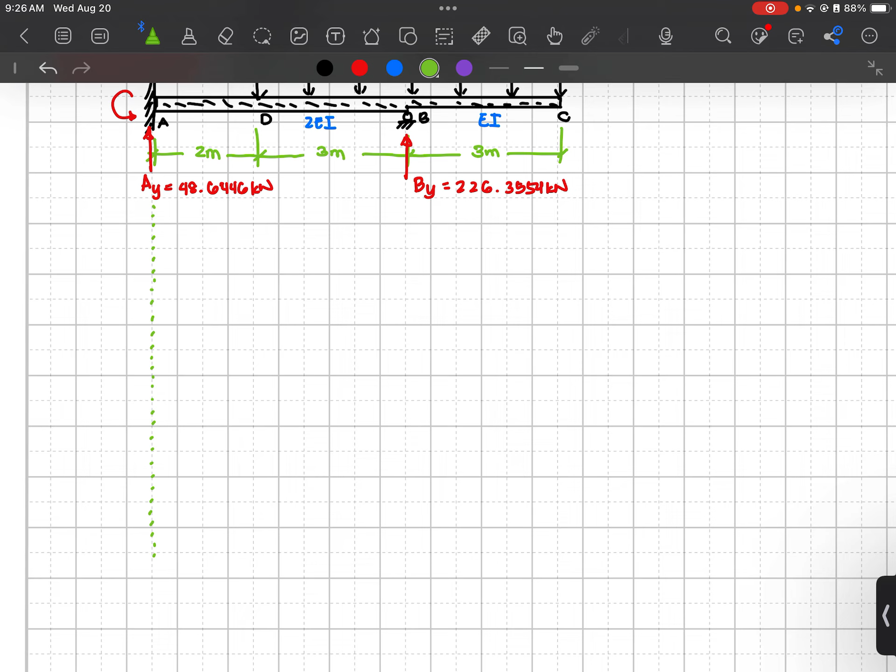But the next step, class, is that the analysis isn't finished until we've drawn the shear and moment diagram of this indeterminate beam. So we need to draw it now. Let me prepare the guidelines for reference first.

So this is now the shear diagram. First, we'll draw an upward value of 48.6446. Then for the first 2 meters, it's smooth since there's no load, so it should stay flat.

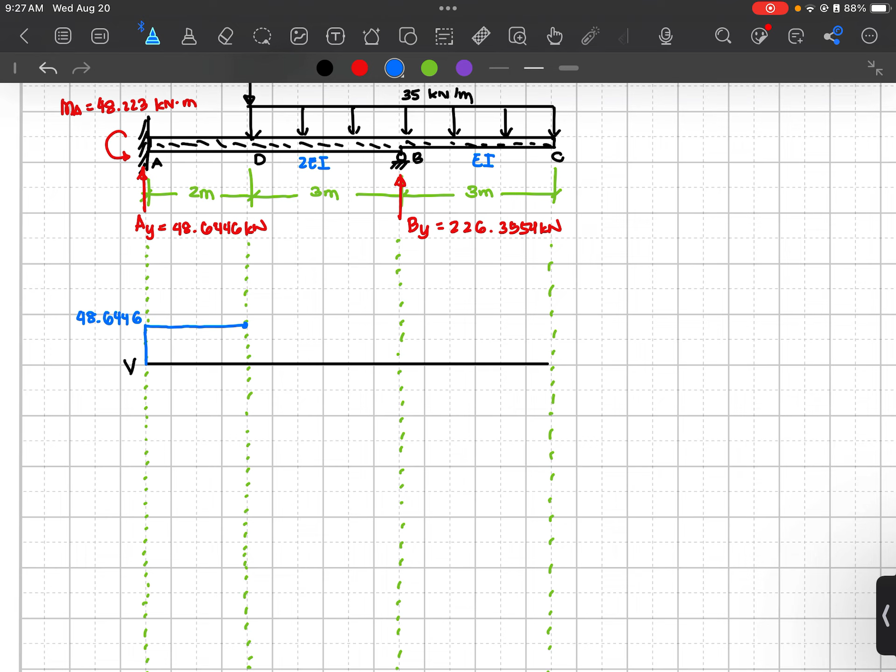Then as you can see, there's a sudden drop of 65. So it should be 48.6446 minus 65, giving us negative 16.3554.

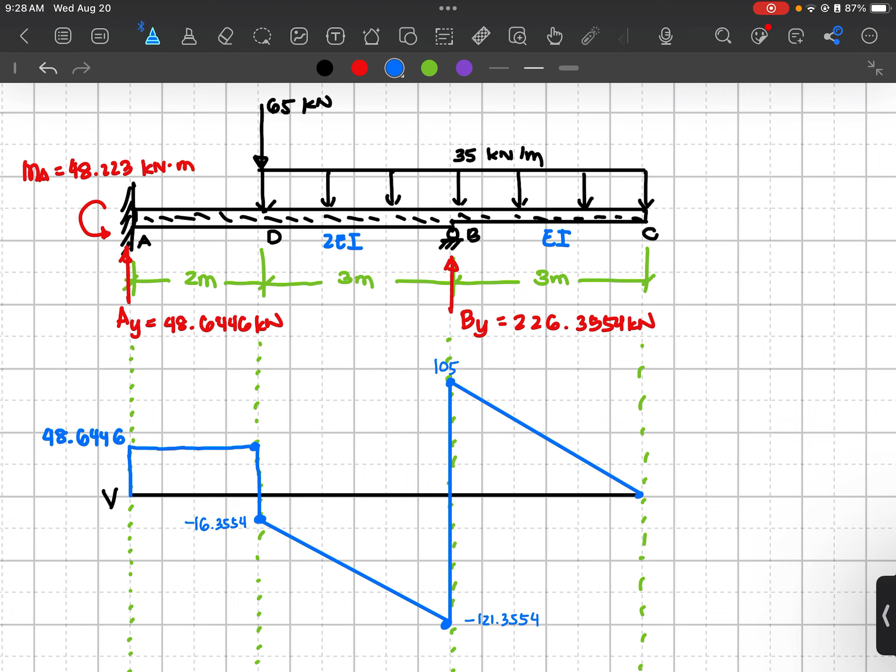And finally, there's another 35 times 3 going down, right? So 35 times 3 is 105, and 105 minus 105 is 0. So this is now your shear diagram, and as you can see, it really makes sense.

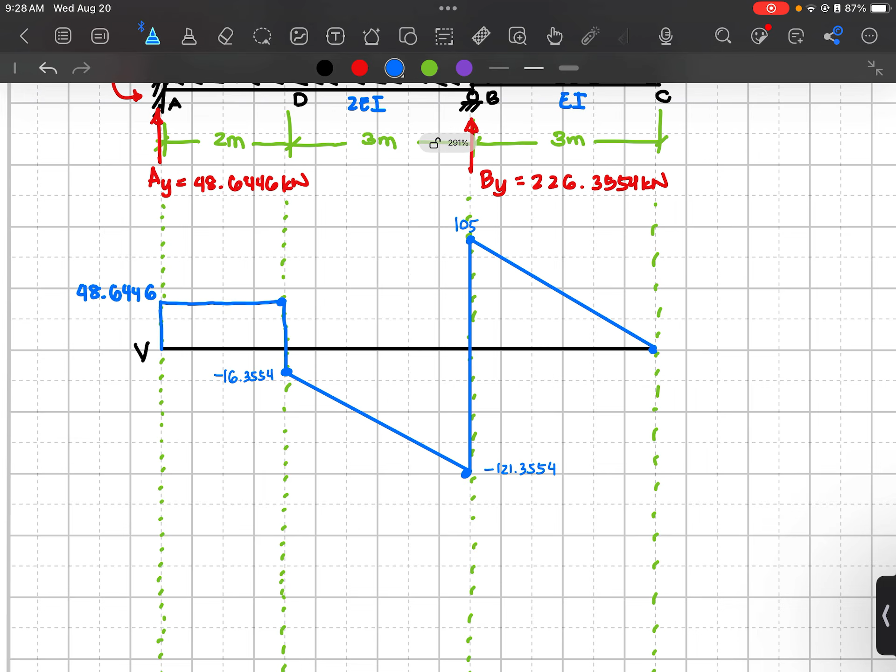Before proceeding to the moment diagram sketch, let me find the areas here in the shear diagram. For example, this area is 48.6446 times 2, which is...

97.2892. Let me adjust this. Then this is 1/2 of the base, negative 16.3554, then 121.3554, times 3, so the area there is negative 206.5662. Then on the other side, 1/2 of 105, times 3, so positive 157.5. So those are our areas.

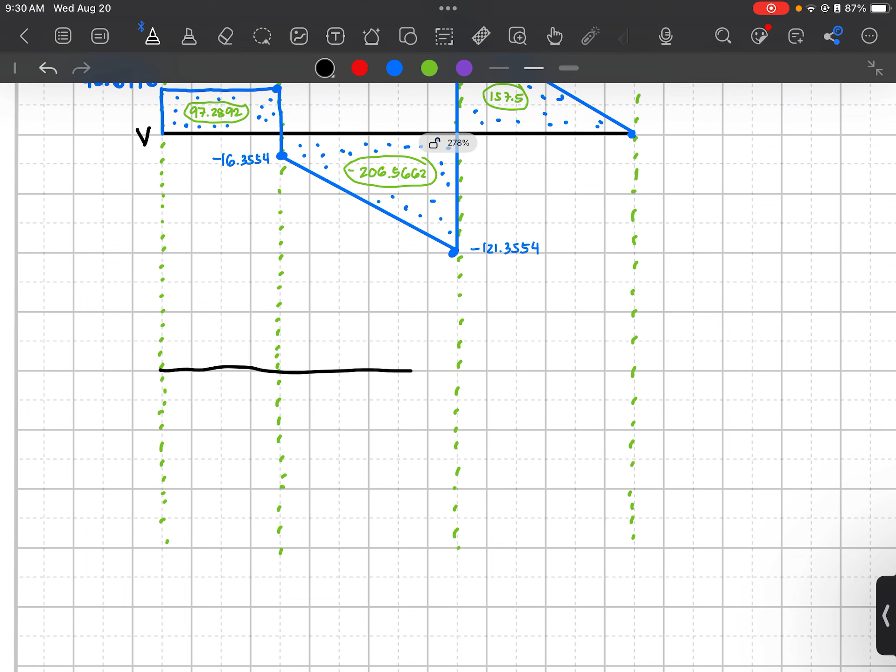So let's proceed to the moment diagram since we need that too. Let me prepare the moment diagram.

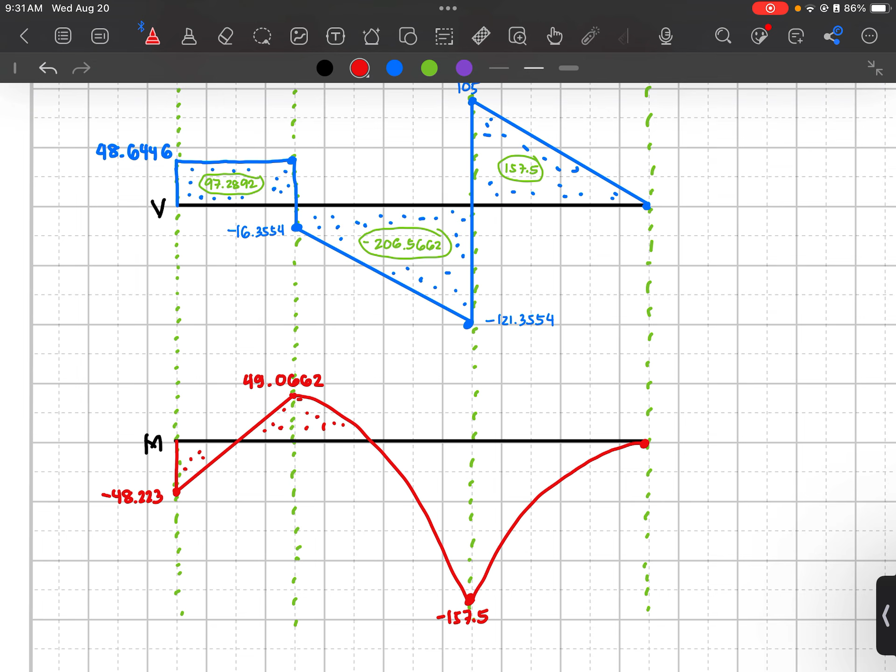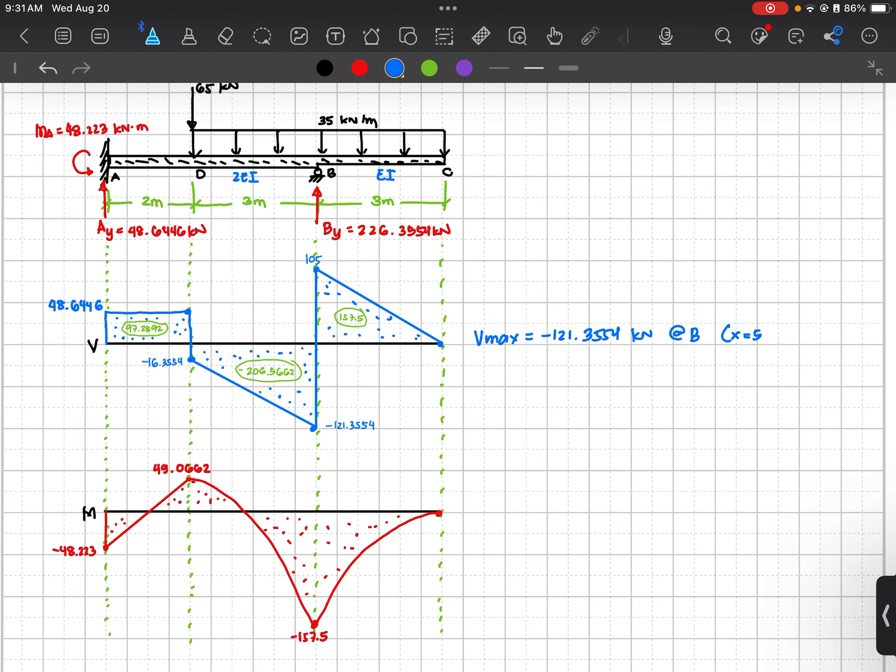Of this indeterminate beam. So what's our conclusion here, class? Of course, our Vmax, as you can see, is negative 121.3554 kilonewton at B, or at X equals 5 meters, since that's clearly where the maximum shear is.

Meanwhile, for the maximum moments, there are two. First is the maximum positive moment, which is 49.0662 kilonewton meter at point D, or X equals 2 meters, since we're using the left as our reference.

Then the maximum negative moment is here, negative 157.5. So the maximum negative moment is negative 157.5 kilonewton meter at point B — sorry, the first one should be point D, this one, then this one is B, at X equals 5 meters. So this is now the complete analysis of the beam.

We've also properly drawn the shear and moment diagram. So I do hope you understood this example for today.